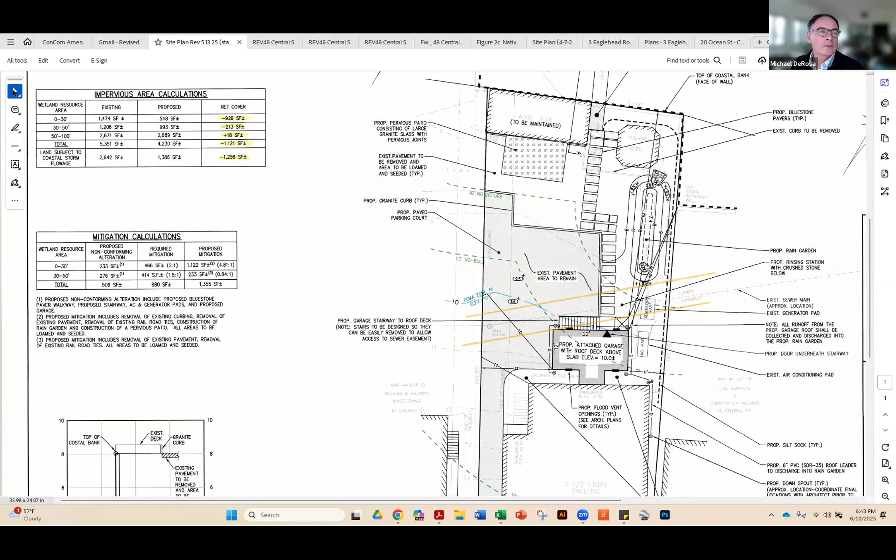It's from the engineer's plan. I can take my lines off, but you can see they're probably from, maybe Letitia can talk more eloquently about it, but I think they're from the easement language.

From the survey. Yeah, so I'm Leticia with the Moore and Cameron Group, 66 Elm Street, Danvers, Massachusetts. All the existing conditions came from a precise field survey from North Shore Survey. All the general notes are on the top left corner. And then the easement lines come from the deed.

One of the reasons I ask about these is that there is a sewer easement line marked with S's and intermittent lines, and then there are two boundaries around it at a distance of maybe 8 feet. But it's not perfectly in the middle of that boundary. So I'm wondering which of these is the most reliable line. Is it the one marked S?

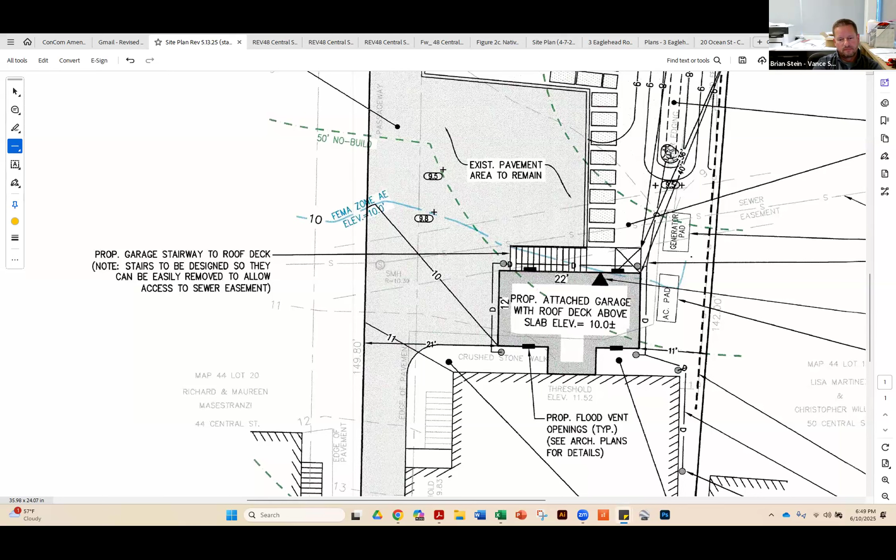So just to review what you said about egress, it wouldn't be sufficient to be able to go into the garage from the lower level? Not from that bedroom, no. Bedroom needs an egress window. Or a door that goes out directly to the outside.

Okay, anybody else on the commission? David? Yeah, Steve, I've got a question.

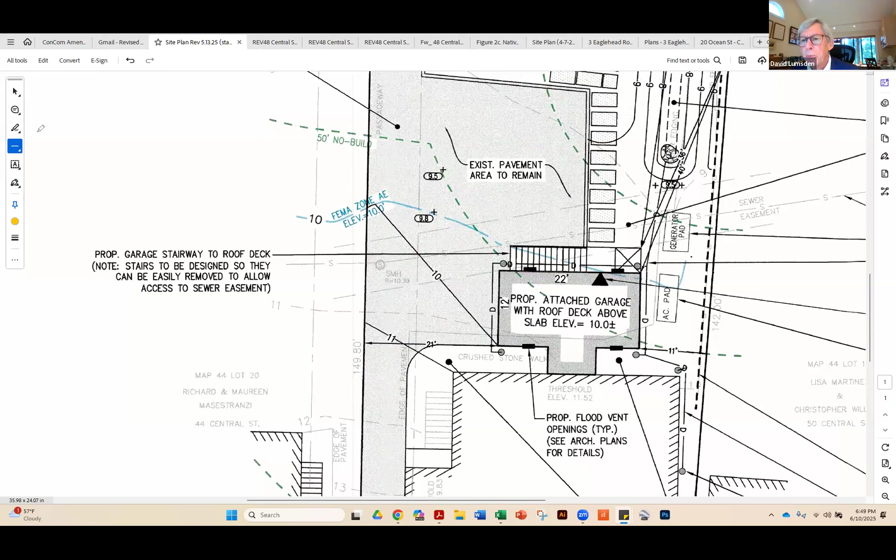I'm concerned about rising sea levels. Did we receive any data on what the MLLW is, the mean lower low water level, on that site? There's data out there on the 19-year average of what the mean low water level is.

My concern is flooding. What are you asking, David? I'm wondering what the level of that garage floor is going to be. How much above the mean low water level will that be? Will it be subject to flooding?

Mean high, you mean? Well, you could give me the mean high as well, if you have that data. The floor of the garage will be just above elevation 10, which is the FEMA flood. Mean high is usually around elevation 4.5.

Well, according to some data I'm looking at right now, the winter storm of 2014 had a height of 14.57 feet above the MLLW. Well, that was probably the result of storm surge. No doubt about it.

Shouldn't we be planning for the eventuality of rising storm surges? Well, we can't design for storm surge. We can design, and we're required to design, for the elevation 10, 100-year flood. So that's what we have to meet, and that's what

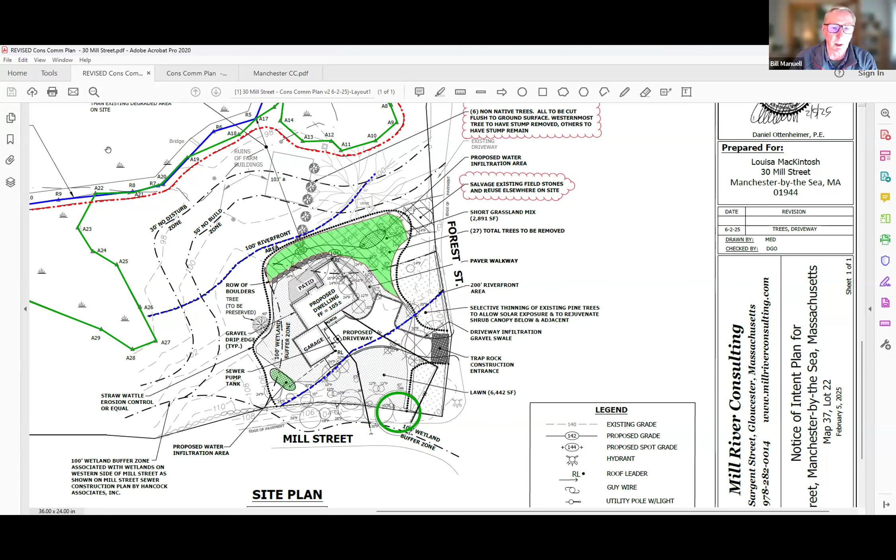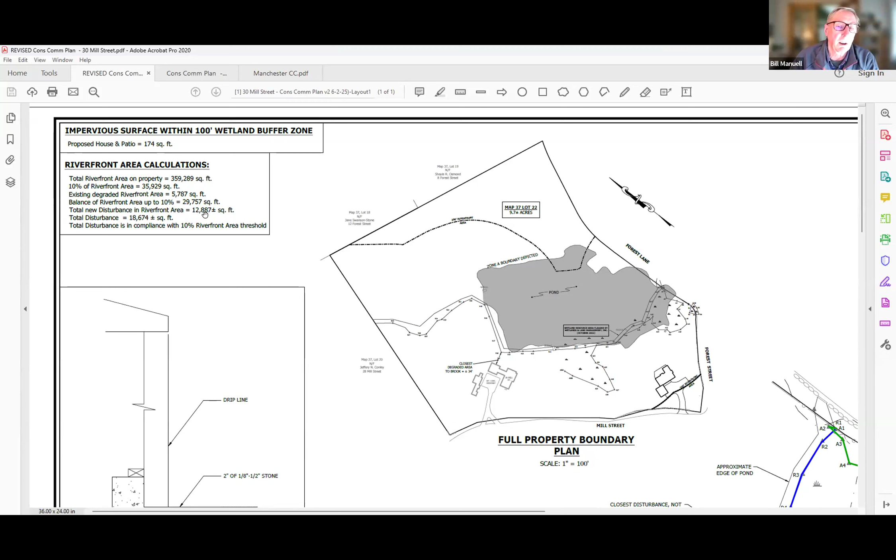The chart of your riverfront area calculations, remember this is a riverfront redevelopment project. The first criteria is we can alter up to the balance of 10% of riverfront area on the property. The site is over 9.7 acres, and the amount of riverfront on the site is about 8.25 acres. So we had about 29,000 square feet of potential impact we could have used in addition to the current house site and still be under the 10%. We're much, much less than that - we're down here at the 12,887 square foot impact. So we are well under the 10% criteria. We meet all the riverfront redevelopment criteria. I've gone over that in my original narrative.

So we think we have a better project here now that we have realigned the driveway. As I told you, Louisa had a walk with the tree warden. We did survey locate all of the trees within the work area and plotted them on the plan - most of them are what I call candlestick pines. They're very tall and slender and only have needles up at the top. 27 of those are coming out, but the tree warden didn't have a ton of heartburn about that. Louisa can convey that conversation better than I, but the gist was tall pine trees like that shouldn't be around a dwelling, so they didn't have a whole lot of concern with the trees being removed, but were appreciative of the efforts to take care of this 43-inch oak.

So with that revision, we hope the commission appreciates the plan, and we're hopeful that you can see your way to close the hearing and vote for an order of conditions tonight.

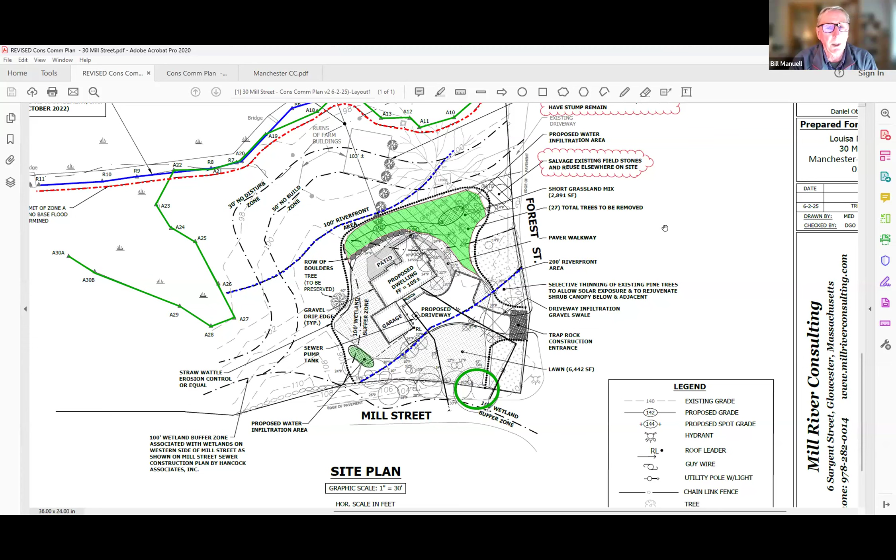That is correct. The overall 9.7 acre property is fairly well undeveloped. The existing home site is only on the order of 5,700 square feet of impervious surfaces and previously degraded area. So the remainder of the parcel is just largely wild. You can see the minimal footprint for the one additional house on this side of the property.

That's great. Excellent. Other questions or comments from the commission? Real quick, Bill, what is a trap rock at the beginning of the driveway? That's a construction entrance or a tracking pad for construction vehicles. When they leave the property, the wheels have a chance to turn over stone and shed any mud or soil that's on the wheel. Ah, thank you, I didn't know what it was. All right, let me ask for any public questions or comments about 30 Mill Street.

I'm hearing none. Commission ready to close this hearing? Yes. I'll move that we close the hearing for DEP file 39-928, 30 Mill Street. Second. Thank you, moved and seconded. All those in favor? Sari, yes. Jeff, yes. David, yes. Olga, yes. Henry, aye. Gordon, yes. And I'll make that unanimous, 7 in favor.

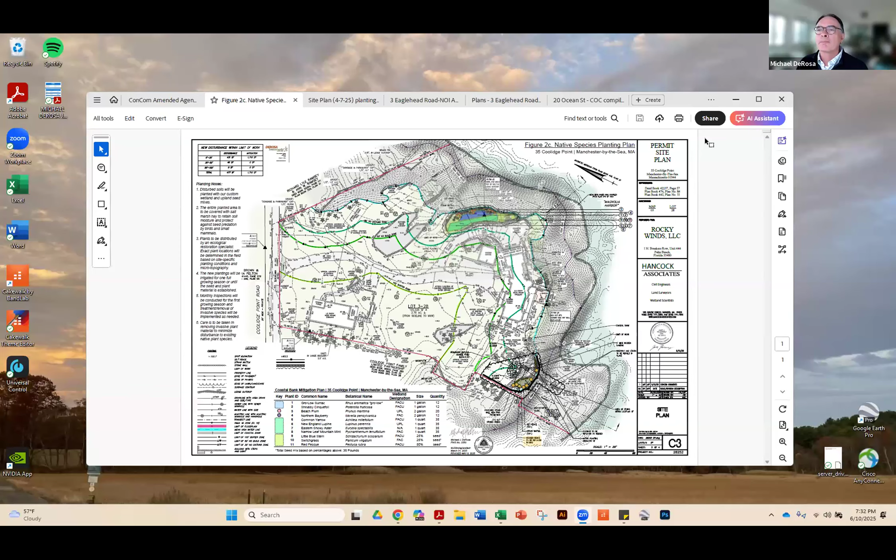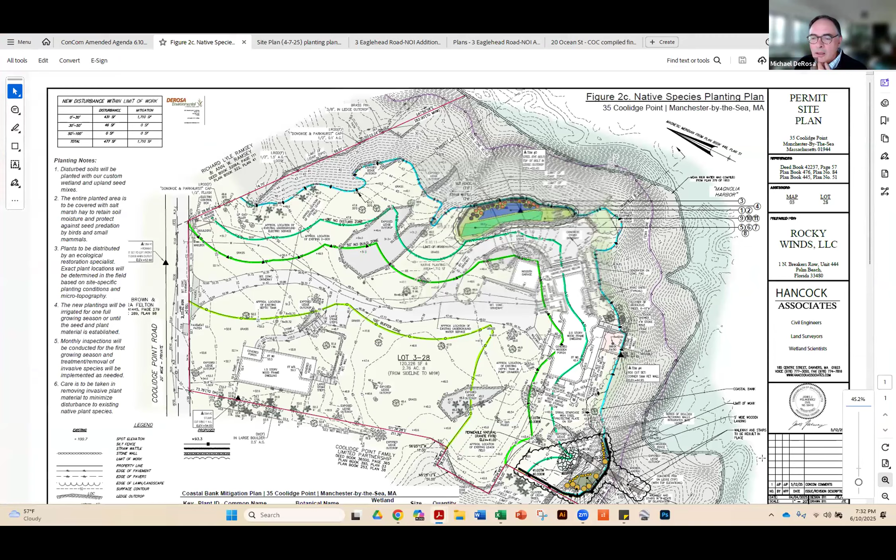Hello everyone, Mike DeRosa, DeRosa Environmental. I'll share my screen. Since the last meeting we walked the property, and I'll zoom in. There were 2 changes to the plan. As you remember, it's the replacement of the stairs and then the patio.

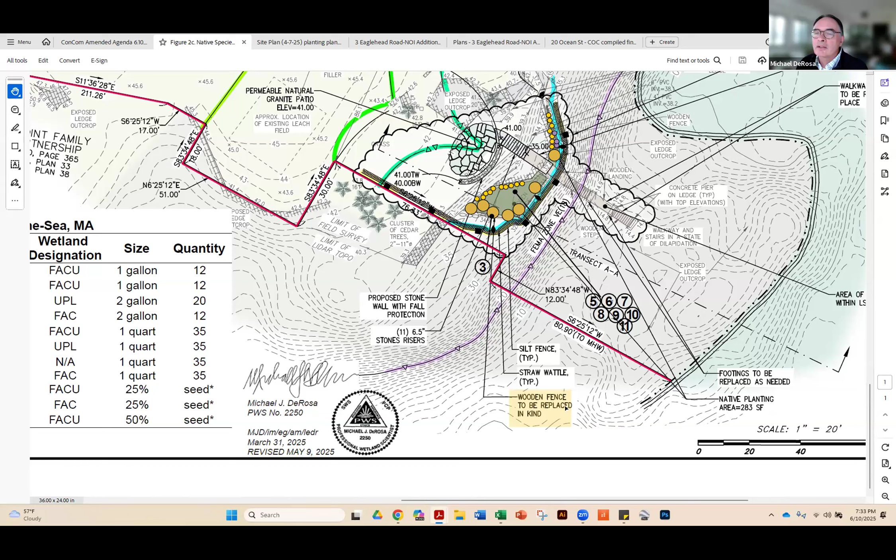We decided, the commission recommended, and we added an additional restoration area here in addition to the one on the other side of the property. This is sort of a low-lying area below the wall that isn't really providing any function, so we decided, on the commission's recommendation, to return this more to wildlife habitat and pollinator habitat. We added additional shrubs and herbaceous material in here. And then the other thing we did was add a note for this wooden fence that's there already to just be replaced in kind. So those were the changes we had based on the site walk.

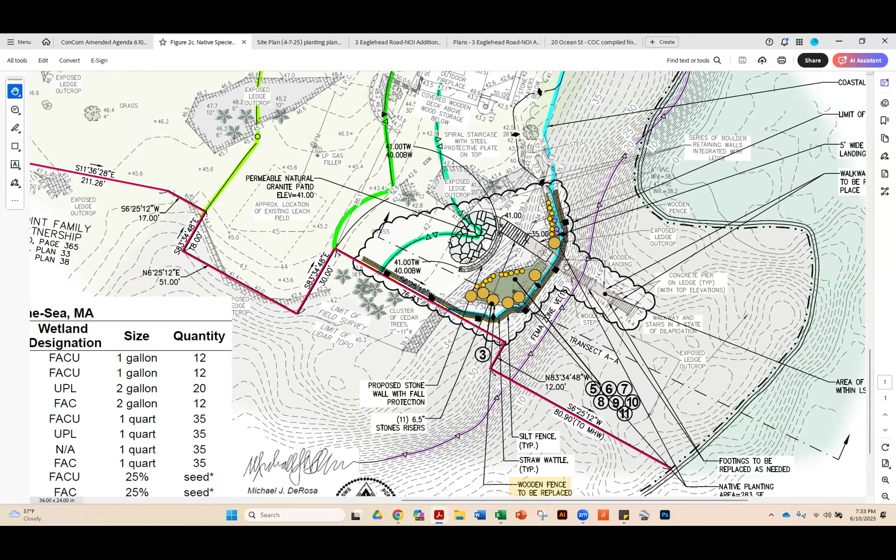We can take questions now if you want, but we're hoping the commission... Anybody on the commission have a question or comment for Mike? No, I'm pleased with this project. Yeah, so am I. Anyone in the public? Did they have a site walk question? It was really helpful to understand what was going on with this, so I'm very supportive of this.

Excellent. Anyone in the public have a question or comment on 35 Coolidge Point Road? I'm hearing none, so commission ready to close? Yes, I will move we close the hearing on 35 Coolidge Point Road, 39-930. Second. Thank you, all those in favor? Jeff, aye. Olga, aye. Henry, aye. Gordon, aye. David, aye. Sari, aye. And I am an aye as well. That's unanimous.

Thank you, Mike. Thank you everyone. Hey, Stephen Gang, Larry LaFreniere, thank you very much. You're certainly welcome, Larry. Thanks for attending, welcome to Manchester. Thank you, team.

Now we have a new notice of intent from the Plains, Manchester by the Sea. The owner and applicant is Manchester Housing Authority. This is Mass DEP 39-933, map 58, lot 66.

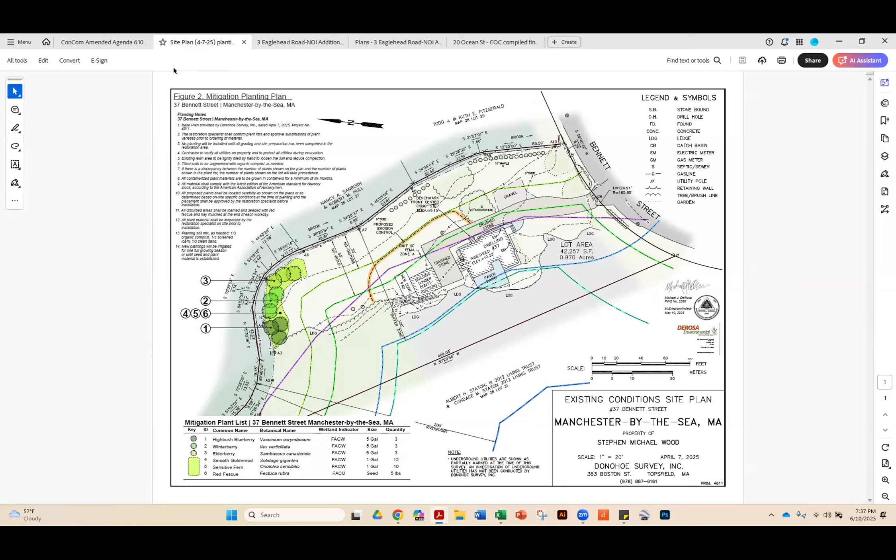Is that staying in place? I don't think we had a problem with that at the site visit. It's a very temporary structure. It also sits very lightly on the forest floor without any disturbance to the leaf litter or other conditions of the floor. Yeah, there are no footings or anything.

Okay. Other questions, comments, now from the public on 37 Bennett Street? Hearing none. Steve, I noticed one thing.

Yes, David. There's a lot of debris from that outbuilding. It's piled, and it looks like it's within the restricted area. I could be wrong, I didn't measure it, but we should be asking for that debris to be removed — it's been sitting there for months. That's brilliant, David. It's been drafted into the special conditions. Okay, good, thank you, good catch.

We'll get to that when we get to voting on the notice of intent, the order's conditions. All right, I'll move we close the hearing on 37 Bennett Street, DEP file 39-931.

Is there a second? Second. Thank you. All those in favor? Sari, aye. Gordon, aye. Olga, aye. David, aye. Jeff, aye. Henry, aye. And I'll make that unanimous, 7 in favor.

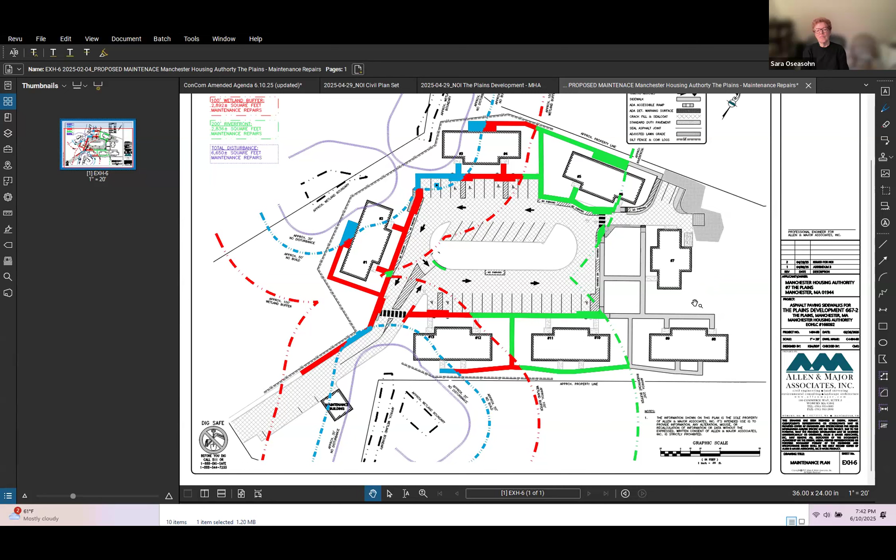And again, this is all previously developed within these setbacks. There is no additional layout or reconfiguration given the layout of what is existing on site. Excellent, thank you. So the small amount of additional impervious is outside of our jurisdiction, correct?

Yes, and they've been looked at. We've kind of transferred some of that proposed impervious to gravel in the back there, just to keep this a no-increase of impervious surface on the site. Excellent, thank you. Other questions or comments, from David?

Thank you for doing this project. As a former chairman of the Housing Authority, I'm very much an advocate for rehabbing or restoring our elderly housing units here in town. Wondering, where's the funding coming for this project?

This project is in HLC, Executive Office of Housing and Community Livable — Housing and Livable Communities, formerly the DHCD. So it is state funded, it's a state funded project. Who applied for the grant?

My understanding of how these work: the Housing Authority executive director works with the state project managers assigned to different housing authorities, and they make a list of items and repairs that need to be done. Site improvements come through funding. Every housing authority gets a certain amount of money every year based on the number of units that they have, so less units, less money, but it is yearly funding grants. Someone from the state or the housing authority can probably speak more intelligently on that.

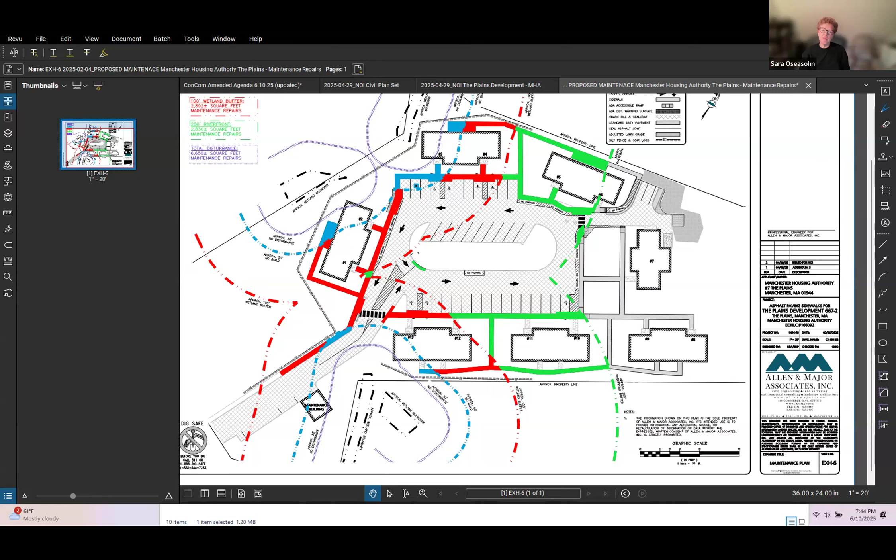Yes. Can I hear a motion? I move we close the hearing on 0390933, The Plains, Manchester by the Sea. Second. All those in favor?

Olga, aye. Henry, aye. Jeff? Jeff. He's making eyes as best he can, aye. Thank you. Gordon, aye. David, aye. And it's unanimous again. Thank you, great. Catherine and Allen and Major. Great, thank you so much.

We come now to two projects which are probably the main event this evening. But before we introduce those, I'm simply going to remind you that this is the Conservation Commission, and our job is to protect wetland resources, not property values, or to delve too deeply into engineering alternatives as much as we might like to, nor to be the beauty police. We don't control aesthetics, so I'm going to ask people to limit their questions and comments to things that we can act on as they pertain to wetlands.

Thank you for that preliminary. Let me introduce the first one here, which is Mass DEP 39-934, Central Street: a proposed municipal project to remove the so-called tide gate, replace the existing culvert with a 20-foot wide arch culvert, and make minimal roadway improvements. This one's all within riverfront, land under the ocean, coastal beaches, coastal banks, and land subject to coastal storm flowage. The applicant is the town of Manchester.

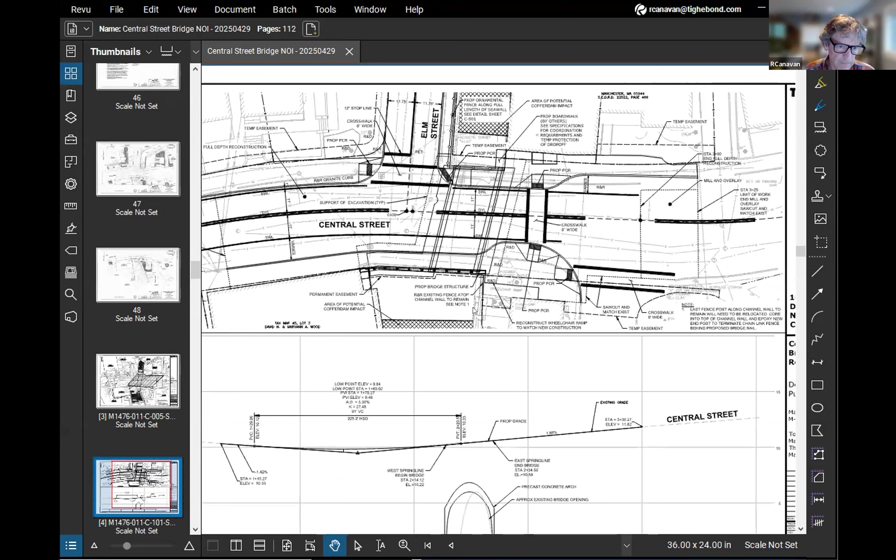It's a full traffic closure, and here are some images of the replacement.

So this is the existing bridge opening and the proposed bridge opening. It's an expansion of the hydraulic capacity to allow for better tidal flow into the pond area, which improves the hydraulics of the opening and improves the ecology of the upstream pond and stream.

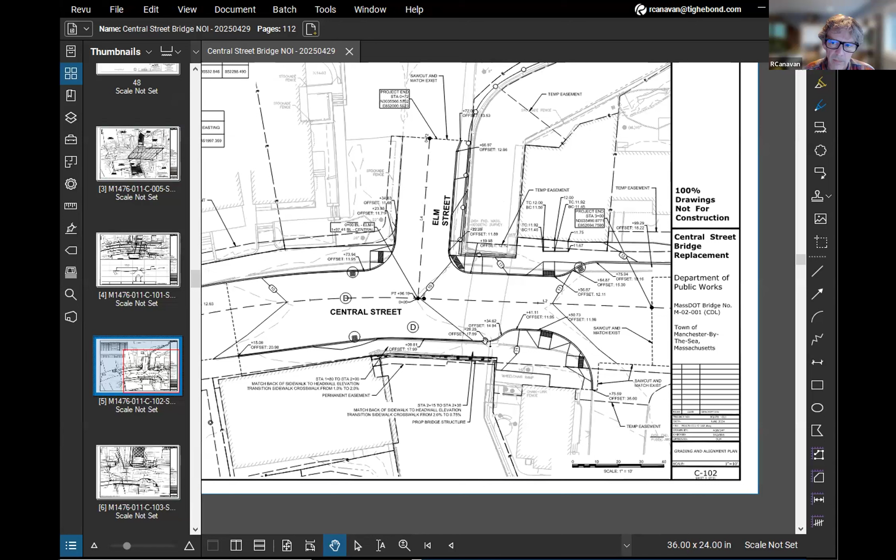The project includes—there's not a lot of space for stormwater improvements, but there's a new deep sump catch basin where my mouse hand is, and some traffic and pedestrian safety improvements in the intersection area. It's a very tight project space, so there's not a lot of opportunity for other mitigation, but the main mitigation is the significant improvement of stream flow through the existing crossing from existing to proposed conditions.

So I think I'll probably leave it at that. I understand there's going to be a lot of questions, we can get into specifics, and I'll keep the plans up if folks have specific areas of the bridge they're looking to discuss.

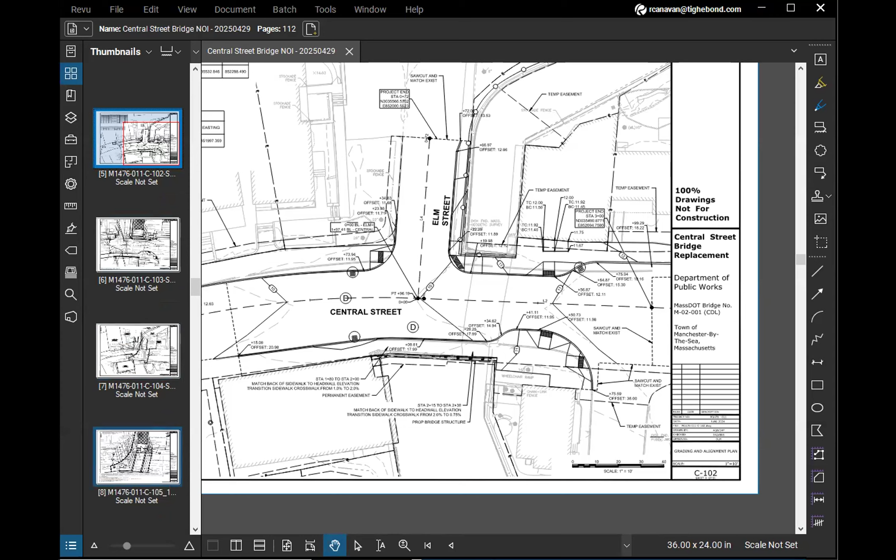So it's an appropriate question back to Nate and Chuck, the engineers, to expand further on that. It's somewhere further in these drawings. Thank you, Gordon, thanks.

Nate, do you have this one? Yeah, so we discussed that with Susan. She came to our office and expressed those concerns, which we relayed to our consulting engineers at Tighe & Bond. Those comments are part of our final markups on the bid set.

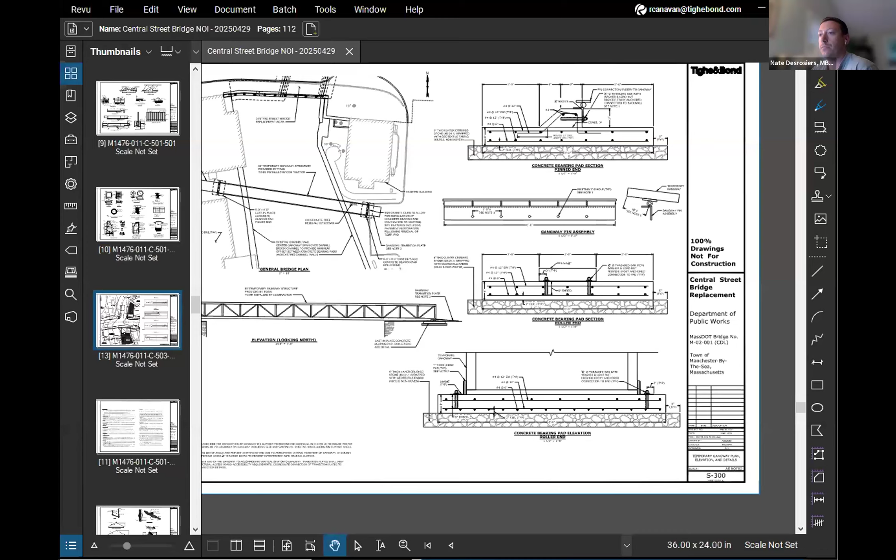We did work with the engineers to basically reduce and move that path back. Rick, if you can go to that previous page you were showing with the corner of Elm and Central. Sorry, yep, no problem. Where is the temporary bridge? So I think we're conflating two items here.

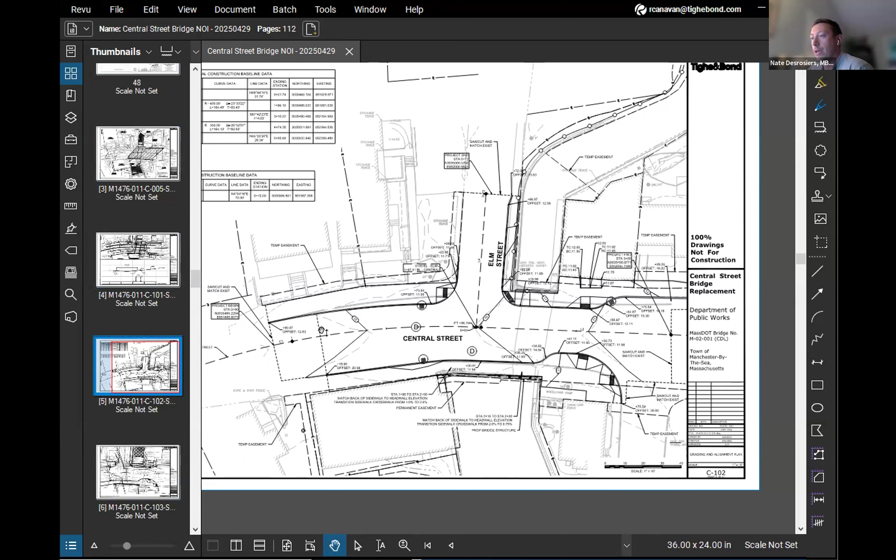There is a separate gangway that we are proposing on the south side of the culvert behind Seaside One, and it would land on the Sea Rock Estate property between 26 Central and Sea Rock, but entirely on the Sea Rock property. The question Susan was asking is more specifically about these two trees on the corner of Elm and Central. We were essentially showing there, yeah, if you can zoom in, perfect.

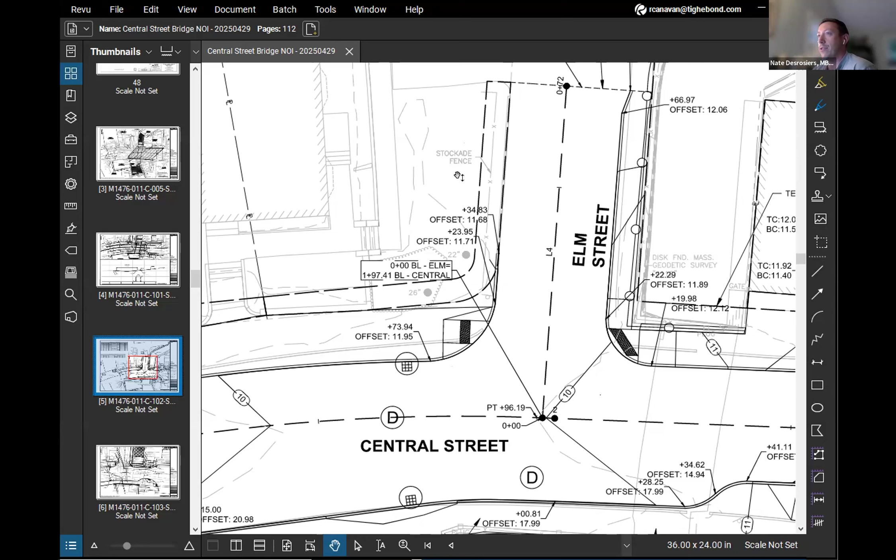Because we have to reduce the lane width of Elm Street to facilitate construction, it goes to one lane. So we were basically forced to push the lane over, which would have pushed the easement area into those trees. We worked with the engineer to revise that area, reduce the easement, and pull back that walkway. I think there's another plan that shows where the stockade fence is. That would be a temporary sidewalk to allow pedestrians to safely get down Elm Street. So we've pulled that all in and tightened up that area, so we do not have to remove either the 22-inch or the 26-inch trees shown.

Okay, good, thank you. But also people should realize there is an easement between Elm Street and Morse Court that goes right through Sawmill Circle, and Windover left that easement there, which could easily be a pedestrian walkway. So you wouldn't even have to knock down our stockade fence and have people walking through our front yard, it can go right through Sawmill Circle. The easement is there and it goes right onto Morse Court. The Morse Court property is owned by Sea Rock, and Eddie Favaza owns Sawmill Circle. So that easement exists and can be used for pedestrian walkway instead of using our yard. That's good to know, thank you.

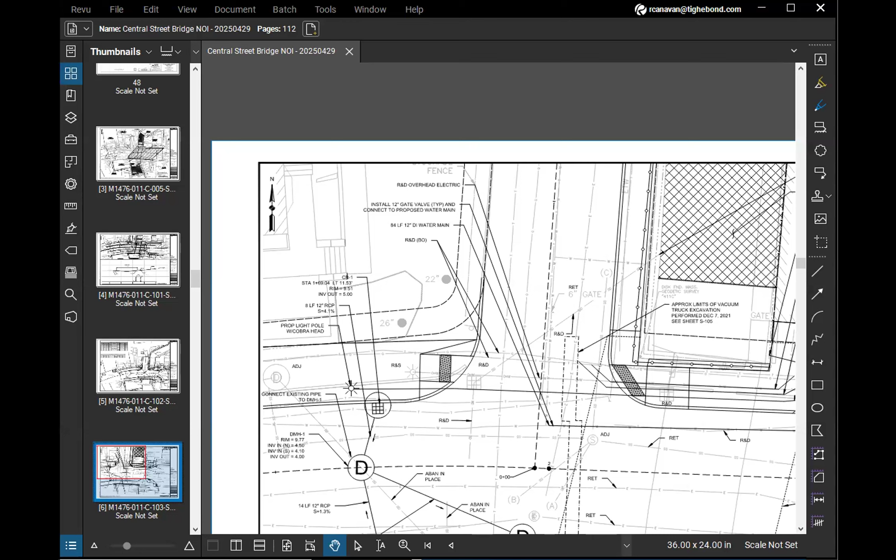Well, I'm glad to hear you've re-engineered this so the trees don't need to be removed. If it's just a temporary walkway, I presume there won't be any significant excavation or damage to the tree roots. Correct, we would keep that all above surface level. That's great, thank you. And just for clarification, Steve, is there any concern about the temporary gangway and any environmental impacts that might have, or has that been resolved with this change?

The one behind Seaside One. From the public comments, yeah, I think there were a few. There's one tree behind Seaside One, but was there any other public concern about environmental impacts of that? Actually, it encroaches on my property.

Rick, do you have a map up? Because I no longer have it. Yes, we're seeing a map of the intended site of the temporary gangway. Okay. I've lost it. Better? No, but that's okay, I'll look at the plans. Sounds like it's on your end. Are other people having trouble seeing the shared screen? I see it, I have two screens, both on. Good, I see it.

Okay, so that one calls for the removal of a small tree behind Seaside One. And yeah, obviously some parking spaces too. Yeah, and again, we're hopeful we can realign this. Basically it's going to have to swing a little bit, on the western end it will come south, the eastern end will go north, closer to Seaside One. Hopefully we can save that one tree there, but it may require removal, which we would obviously replace in kind after the project, or with whatever tree the commission would like there. And we can certainly work with the tree warden to make a selection.

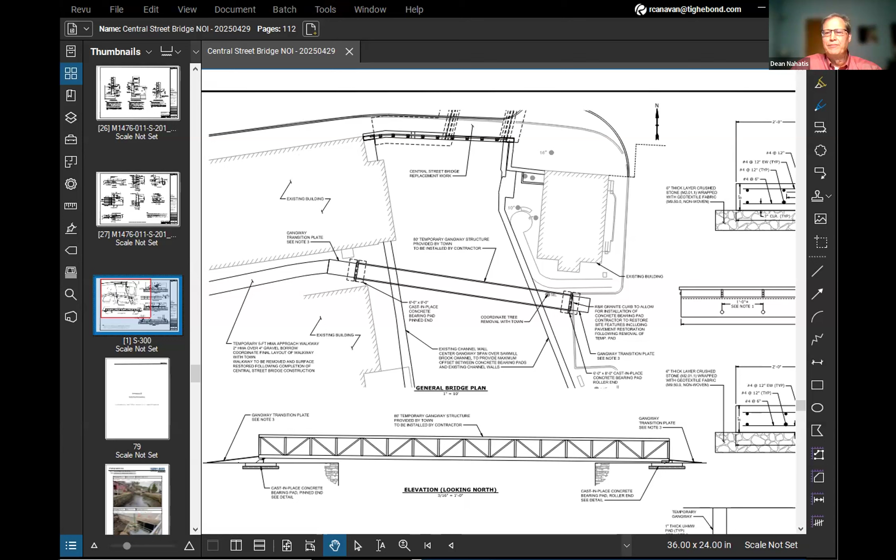Other members of the public have a question, concern, or comment? Not hearing any.

Commissioners, are we ready to vote? Steve, could we please vote on this? I believe we're ready to vote. Is the commission ready to vote?

Yes, I'm sorry, this is Christine Delisio. I have some questions. Who is this, please? My name is Christine Delisio. I see, and your address, Christine? 6 Lincoln Avenue. Thank you. Go ahead, I have a few things.

So I understand from the last comment that this did go through the MEPA review. Was a notice of project change filed for this go around? The project hasn't changed, so no. Okay, so is that still a valid application if it's 5 years old at this point?

Yes. Okay, and so I believe there was some property that changed hands within the project, so isn't that a significant change in the MEPA process? No, I don't believe it would be. Okay, I would like that on the record.

And then I would like to know how the people on the pond and Sawmill Brook were notified. I have several friends in that area, and I think I may actually be within 300 feet. I'm just curious how people who live on the brook, on the pond, were notified, because many of them I know did not receive notices.

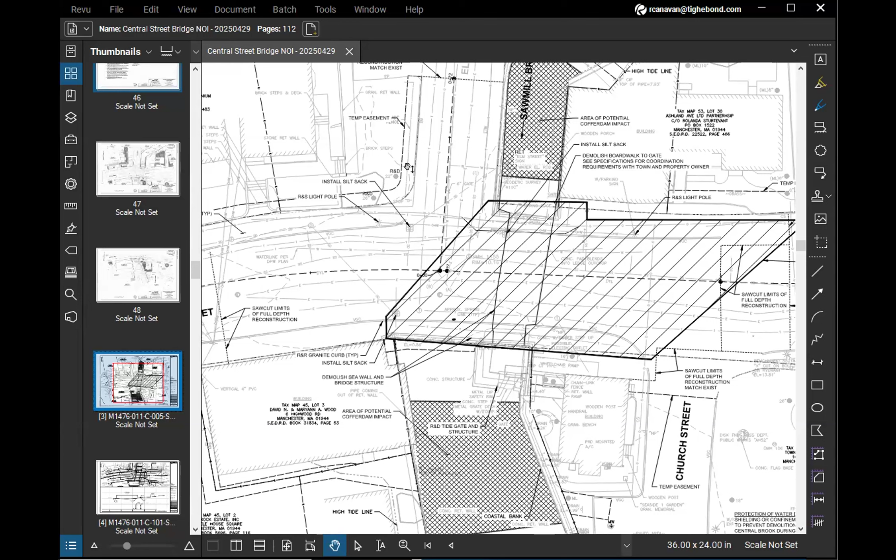So for the pond and the bridge NOIs, we had submitted to the Manchester assessor, as I'd shared previously, the project area for the two different projects. They developed a list of abutters to each of the projects and then provided a certified list, and we sent notices to abutters for each of those projects. It was approximately 40 notices for the bridge and about 80 for the pond.

Okay, I think I did ask for that information. And Ms. Delisio, you can find that on our website under the documents for tonight's meeting, at the end, Appendix C, at the end of the NOI application for this project, there's a 300-foot abutters list report.

Oh great, thanks. So I do have a question. There was some monitoring, some pre-construction habitat monitoring that was supposed to happen in 2020. To me, I'm not sure how you could close that out if that should have been performed regardless of a project. That should be ready to hit the shovel, or whatever you do to do some pre-construction habitat monitoring. When's that happening? Is that for this project or for the pond marsh project? It's for both, they're one project.

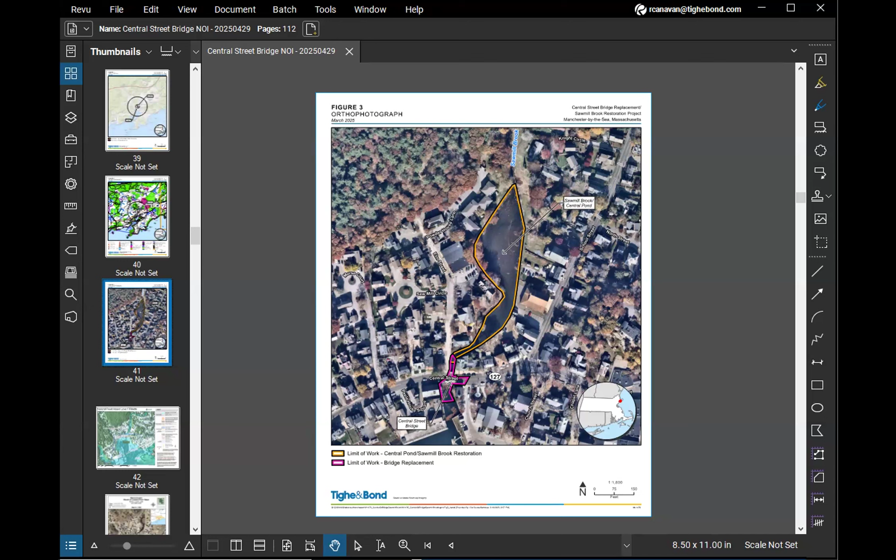I will move that we close the hearing on Mass DEP 0390934, map 28, lot 30, Central Street. Second. Good, second. Thank you, Olga. All those in favor? Jeff?

Aye. Henry? Aye. Olga? Aye. Gordon? Aye. David? Aye. And I am also an aye. It's unanimous. The hearing is closed.

We will talk about the specifics of the order of conditions and vote on that. That brings us to the second of these twin projects, Mass DEP file 39-932, Central Street, also east of Elm Street, town of Manchester-by-the-Sea, map 28 lot 30. Proposed project relative to retaining wall repair, replacement, and construction of a living shoreline. This is also within riverfront area, coastal resource area, land under the ocean, coastal beaches, coastal banks, and land subject to flowage.

Can we have a brief review of what's proposed here, Mr. Canavan? Getting off mute, sorry about that. So I've just shared a plan of the proposed ecological restoration at Central Pond, Sawmill Brook flowing through Central Pond.

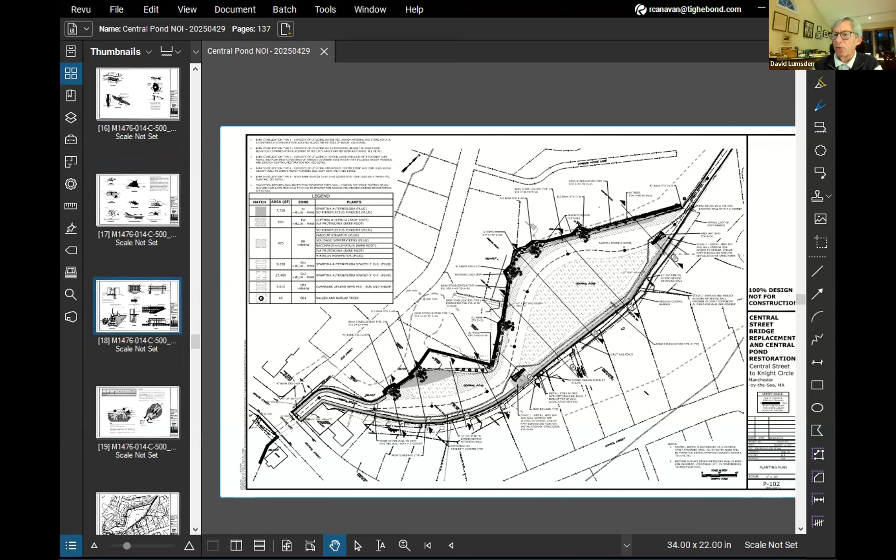Since I lived on that brook, I recall when we moved there in '84, the granite stones on the right side of your map were perfectly in place. Due to storms, the water frequently came up over those granite stones and displaced the stones along most of the length entirely. They were all displaced behind my former house on Knight Circle. So my question is, how will the new construction be any different? It won't be any higher, so we'll still be subject to flooding. But what will be done in the way of engineering to pin those stones against the bank and keep them from piling over again?

Good answer. Thank you for that. Other questions from the commission? How about from the public? You want to have a short, succinct question or comment about this aspect of the project?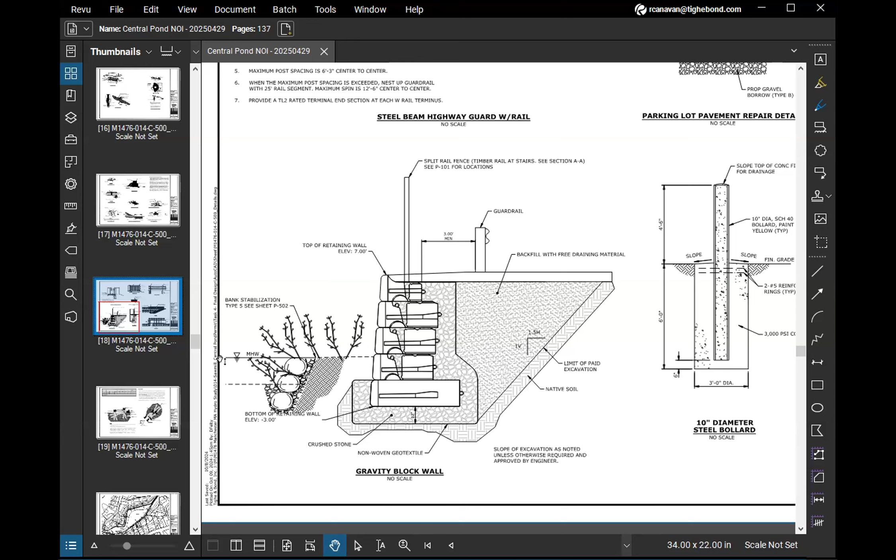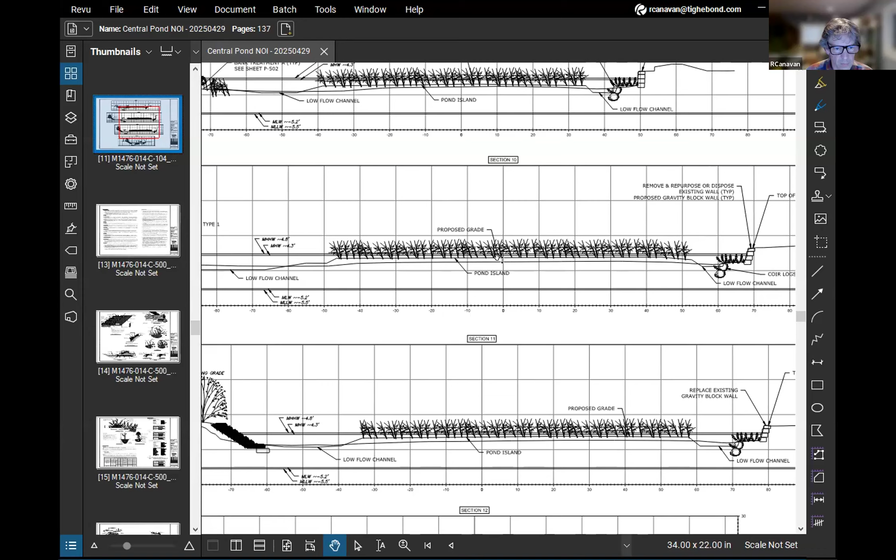Yeah, so like in this particular cross section, we've got mean high water and the top of the retaining wall. There's some other cross sections that show the entire layout of one side or the other, so you can see it. This is a smaller scale, but you can see the retaining wall on the south or east side, the proposed Spartina planting on the existing flat, and then the encapsulated soil lift living shoreline.

So there are mean high, mean low low, and then there's also a scale on the plan, so if you had whatever elevation you wanted, you could look across the sheet. Obviously, I get that it's a tight scale given the width of the pond cross sections, but there are tidal elevations on these cross sections and also an elevation scale on the cross sections that would allow you to look for other references if you had other elevations you wanted to look for. Right, because on the bridge elevation there's an 8.2, which is up above the bank, and that would kind of show more graphically in cross section if you had it there. So I was wondering why it was omitted.

Yeah, I mean, there's a lot of information. It's a wide cross section, so we went with the scale using those jurisdictional mean high and low, and in these cases we didn't have the FEMA on this one. In a lot of cases, like parking lots and other areas are under the floodplain, so that's a little less relevant here. All of our work is in floodplain in this location, so it's not going to change after we're done.

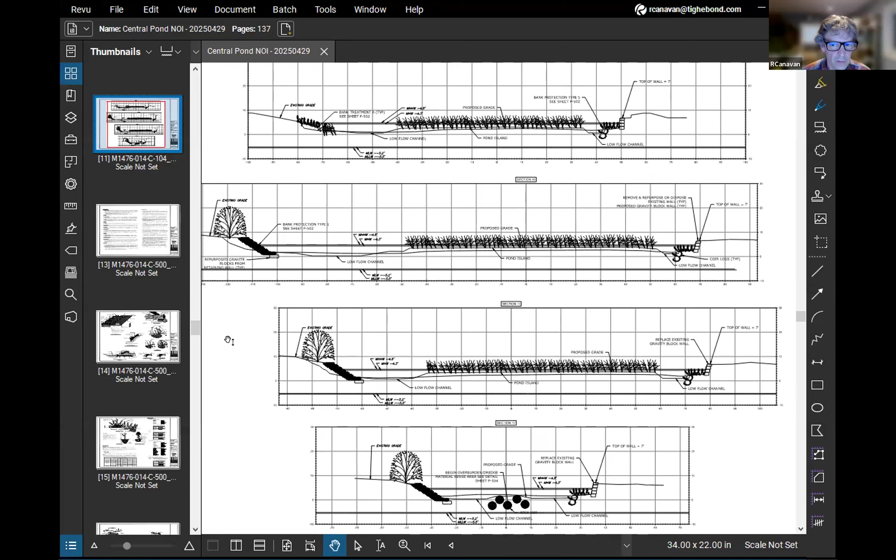Okay, thank you. Thanks for that answer. I see a hand for Marianne Wood, or would you identify who it actually is, if it's not Ms. Wood? There's that hand leftover. Oh no, nope, it wasn't, I just hit the wrong button.

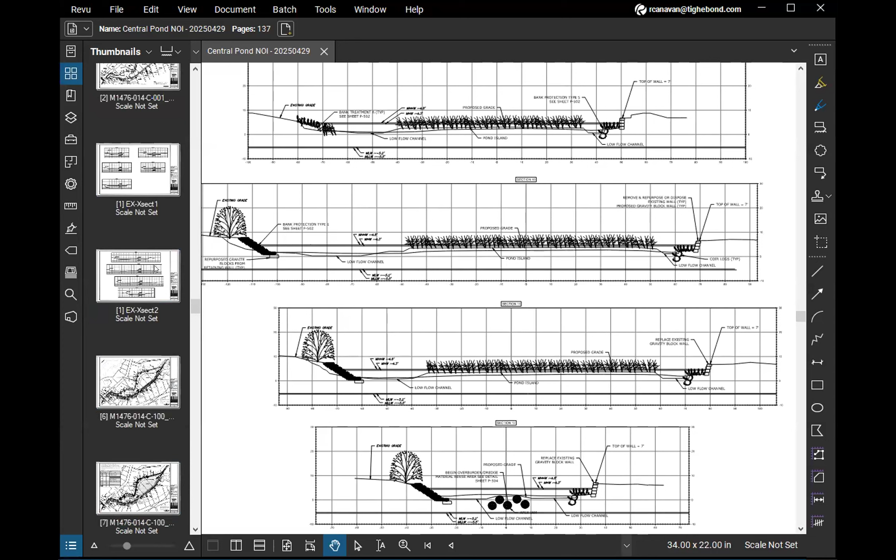Sorry, this is Christine Delicio, 6 Lincoln Avenue. Just big high level, I mean, I think most people have a hard time understanding that you're going to take a culvert, just say for instance it was 1 foot, you're going to make it 5 feet, and you're going to make flooding all along the brook better. So I hear these wishy-washy statements. I'm pretty darn close here, I think we're all going to be affected by flooding of Sawmill Brook and up School Street. So where's the guarantee that this is going to help? When I've read these plans, it doesn't guarantee it's going to help this. So why are we letting more water into everyone's backyards and all along School Street if we can't really tell that this is going to help? Is this like a big guessing game? Is it a big environmental project that's hopefully it goes well? I mean, where's the actual, yes, this will improve?

What is your specific question? Where's the science and where's the guarantee that this is actually going to help flooding on Sawmill Brook and all the properties along School Street?

I'd refer you to the H&H studies that are on the website and the basis of design, and all the studies that were done in 2016 with CZM grant funding that studied the entire reaches of Sawmill Brook, that kind of went through and analyzed all the questions that you're asking right now. Right, they're all on the website with the H&H analysis. Oh, and I've read, I think they are 396 pages, and it says you're not sure if it's going to happen.

Excuse me, why are we doing this project? Ms. Delicio, could you let Mr. Dam finish?

I was just gonna say, I think it is very specific. It shows in the H&H analysis the different storm interval frequencies and the corresponding control. There's absolutely no guarantee that there will be control for future scenarios where there's increased storm surge or inundation, but that's just the nature of Manchester by the Sea in all locations. So this actually does improve the hydraulic condition. There's no doubt about it, and we have not been wishy-washy whatsoever. There's existing conditions and then there's proposed conditions, and if you read for yourself, you'll see it. The only time that I've seen comments like 'may help' is when we're talking about self-regulating tide gates that we haven't evaluated as part of this project. So that's all I can really say to that.

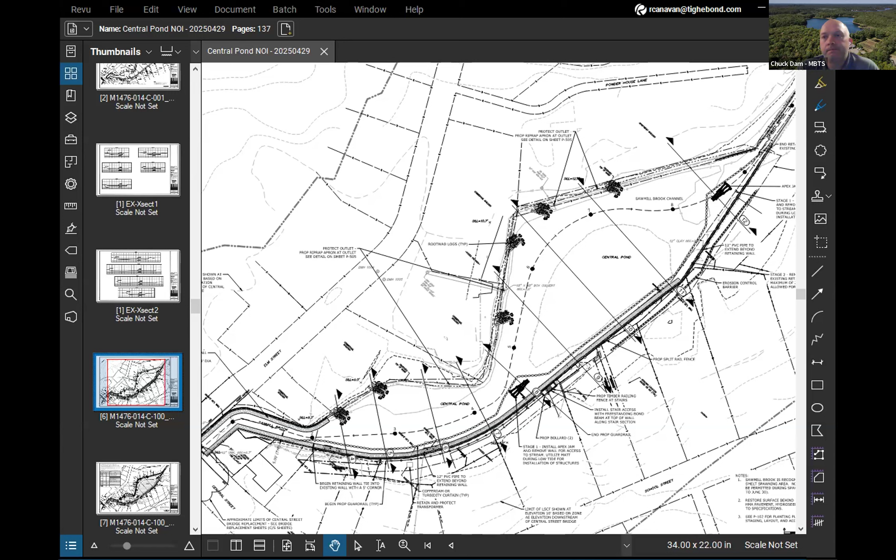Okay, thank you. And I guess from the Concom perspective, we're in the habit of approving projects that we know will be impacted by severe storms and flooding, wave action, storm surges, et cetera, and so does the applicant. So no one's prepared to issue a guarantee that a single project, no matter how ambitious, is going to guarantee that properties stay dry around Sawmill Brook.

Because nobody can issue that guarantee that I know of. Other comments from the public? Questions? I'm hearing none. Commission ready to close this hearing?

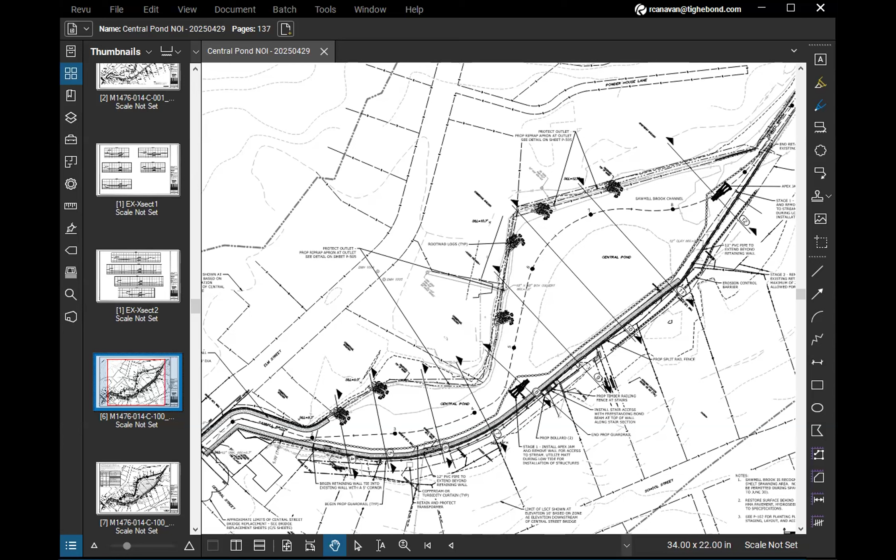Yes. I'll accept a motion. I will move to close 039-0932, map 28, lot 30, Central Street. Second. I'll second. Thank you. All those in favor? Gordon?

Aye. Sari? Aye. Jeff? Aye. Olga? Aye. David? Aye. Henry? Aye. And I am an aye. Unanimous again. Thank you, Chuck.

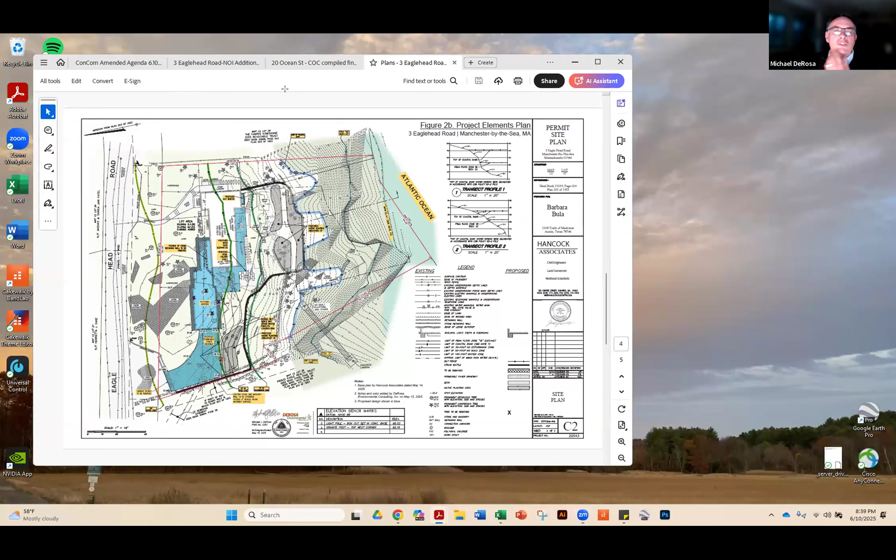Mike, are you? Yep. For the record, Mike DeRosa, DeRosa Environmental, and I'll share my screen. Too many things there. Hold on. Sorry about that. So, 3 Eaglehead Road.

This is the house. I think this commission's been out here before, years ago, for the patio work that we did. I'll give a quick overview here. The project is to cantilever out a little bump out from the kitchen area here, continue a deck out on the top of the first floor level around the corner, and then there's an addition out in the front. I'll go through all the plans with you.

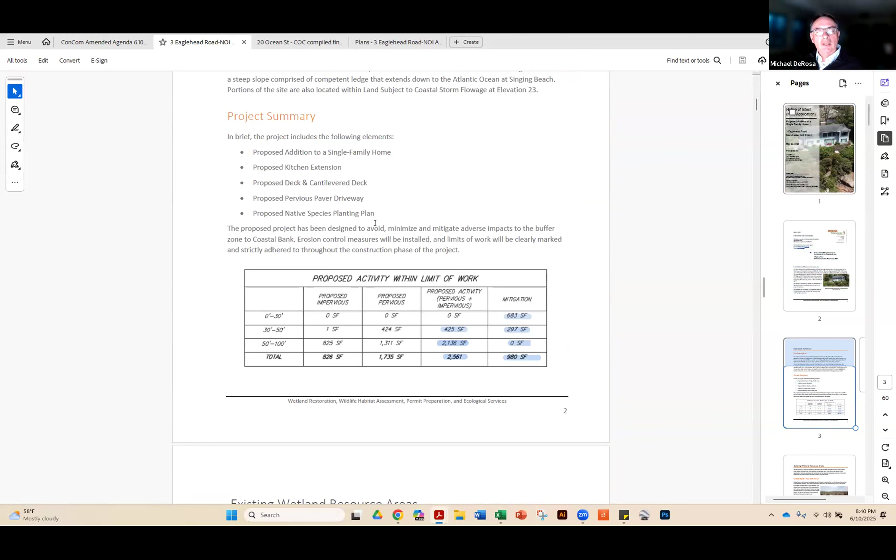So this is the project summary. We've got an addition to the single-family home, out in front of the house by the street, a kitchen extension, the proposed deck and cantilever deck, pervious paver driveway, and then a mitigation planting plan.

The numbers are these: we've got no increase in the no disturbance zone. We've got an increase of proposed activity of 425 square feet in the no build zone, which is largely the cantilevered deck and kitchen addition, and the rest of the work, 2,000 square feet, is out in the outer buffer zone.

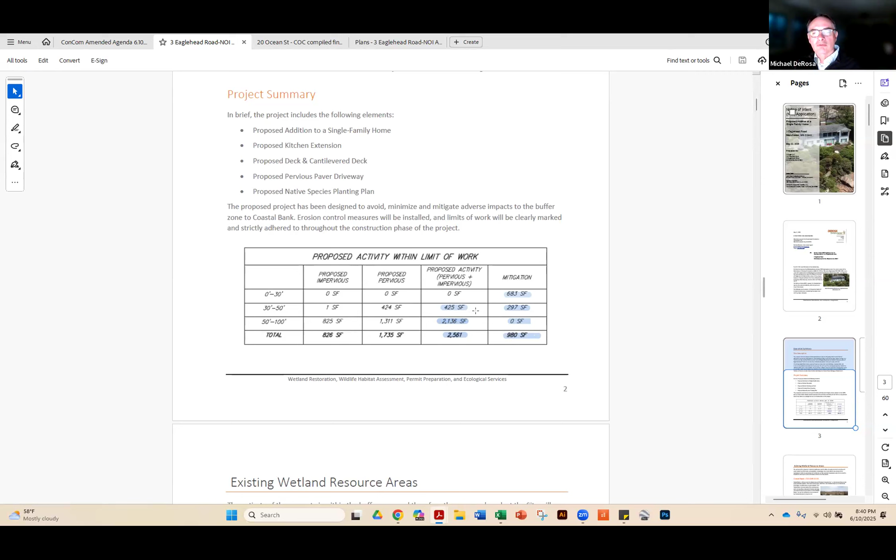We've provided a mitigation plan of 980 square feet to offset the work in the no build zone, the 425 square feet, which I'll go through. Coastal Bank is the driving resource area. I'm going quick because it's getting late. Let me go to the plan.

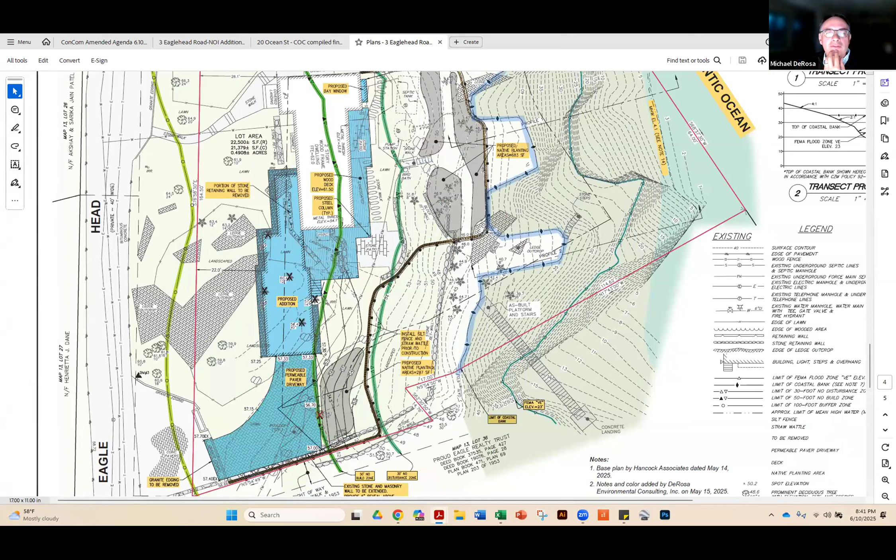So this is the site plan, and I highlighted the different elements since it's hard to see on the regular plan. This is the kitchen addition, which is cantilevered. This whole deck is cantilevered and supported by piles, steel posts here—I think there's 5 of them. That amount of work is within the no build zone, but it's already lawn and landscaped area.

Part of this is over the patio, and then this work is the work that's in the outer buffer zone. So the addition, there's a garage here, and then porous paver driveway, like we normally do. The gray areas are the mitigation areas. There's 6 trees that have to come down as part of the addition, and we provided 6 trees.

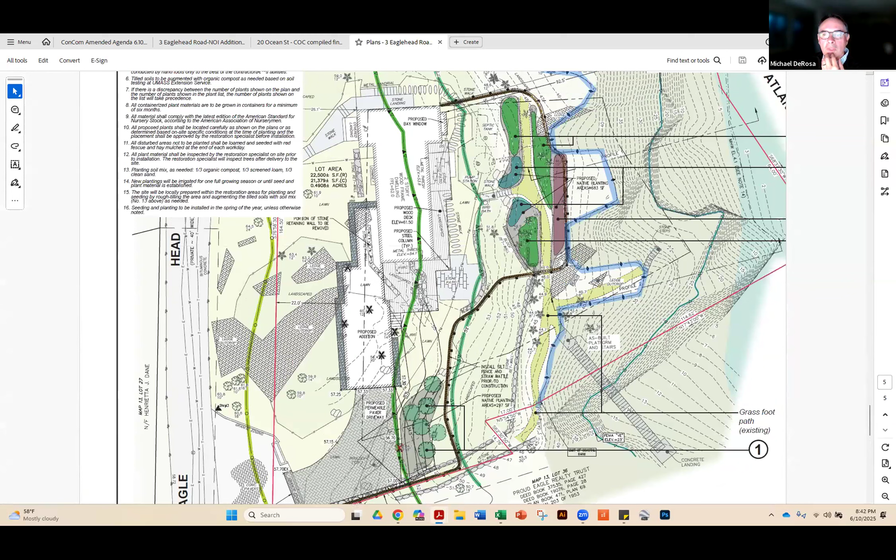I'll go to the landscape plan. So this is our mitigation planting plan, and I'm sure we're going to schedule a site walk so we can go look at this. There's a grass trail through here.

It's like a pitch pine understory, but it's grass. This area is where we want to do the mitigation because we've got mowed lawn that we can convert to native plantings that will do well in the understory and in the acid soils. Then we have this area here, which is 6 more pitch pine, because they're doing so well here we thought they would do well there. We also have understory plantings there as well.

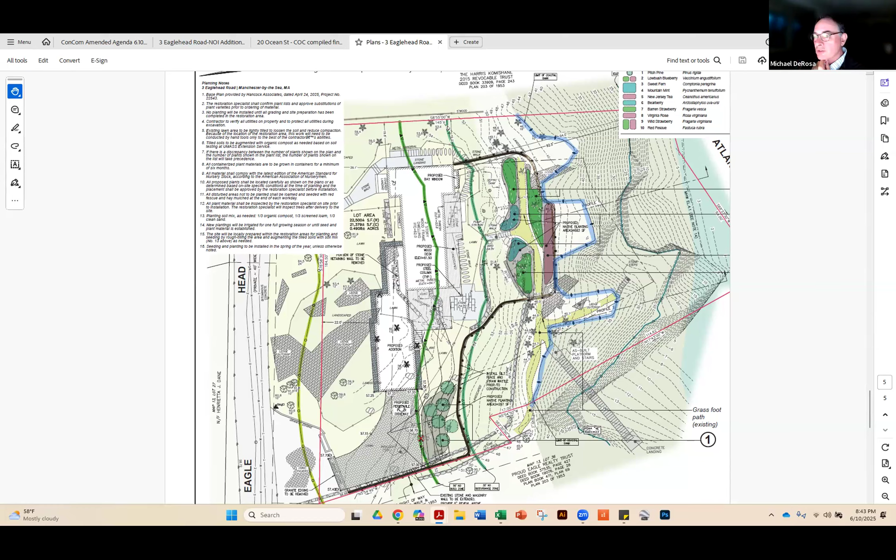So we feel that we've met the intent of the bylaw and the state regulations. The driveway is porous. We have details on the profile. So this is the permeable pavement.

There's spaces between the aggregate and the openings, spaces between the pavers, and then a depth of about 2 feet, 18 inches, 12-inch minimum here to the native grade, and this is all native ledge, really. And then this is all very coarse gravel, sand, and reservoir stone. And then we have a drip edge along the whole addition as well to handle the runoff from the roof there.

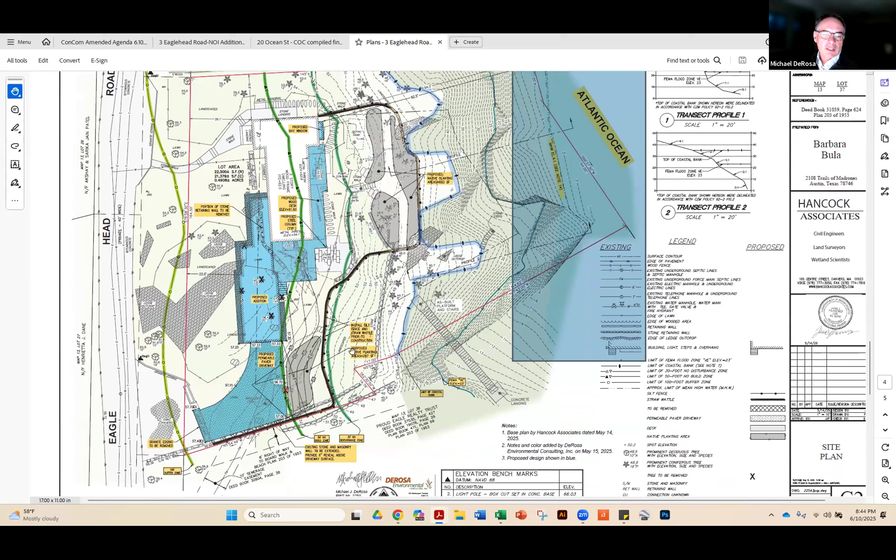So that's it. I think if there's any questions, I can take them now. We can schedule a site walk, whatever you'd like to do. Let's see if there are any questions or comments and see if we can pick a time for a site walk.

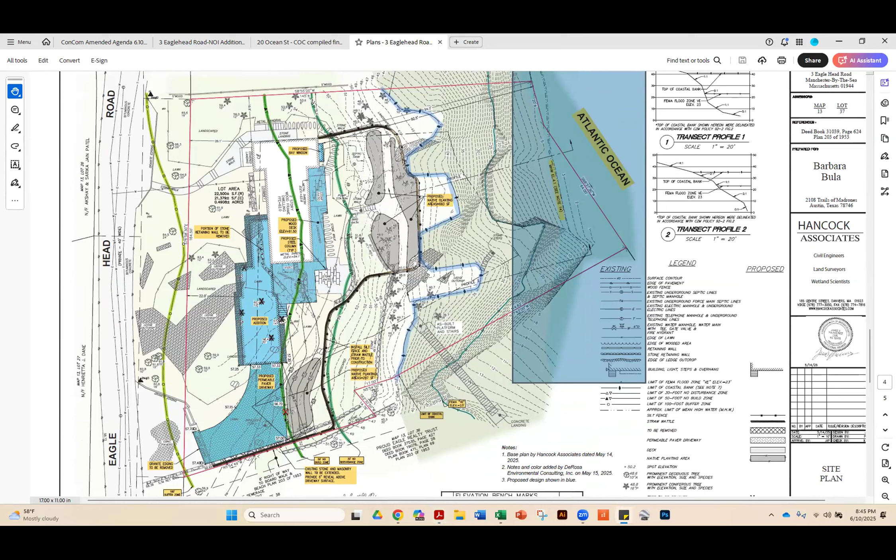Anyone on the commission have a question or comment? No, I just think we... Henry? I think a site walk sounds good to me, and we can hold our questions maybe until that time. Anyone in the public have a comment or question on 3 Eagle Head Road?

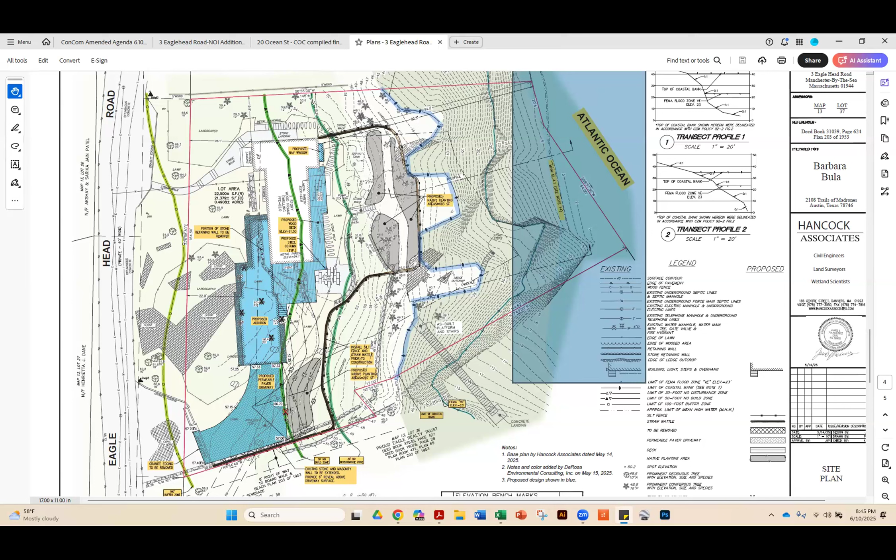Others do Saturday first thing? First thing being 8:30? First thing being around about 8:30, if that's acceptable to Mike or a team member. I can be there this Saturday. It's my mother's 90th birthday this weekend, so I think I have to get down to Cape Cod, but I can go after the site walk, so that'll work out.

Okay, 8:30 then? So who's going to be there? Only Henry and I'll be there. Good. All right, then, but that's only 2 commissioners. Just you and I. Can do 8:30. David? I can do a quick one. I think I can be there. I've got something else, but I'll move around for this.

Is it better earlier than 8:30? Yeah. I mean, I could do 7 o'clock, Mike. I see that look on your face. It's early, fine with me. Okay, we'll set it for 7:30. No, 7:30 is too early. 8 o'clock? Too early. Okay, how about 8 o'clock? Goldilocks. 8 a.m. 8 o'clock, Olga? Yes, good. I'm marching, so... after that. Yes, good for you. 8 a.m.

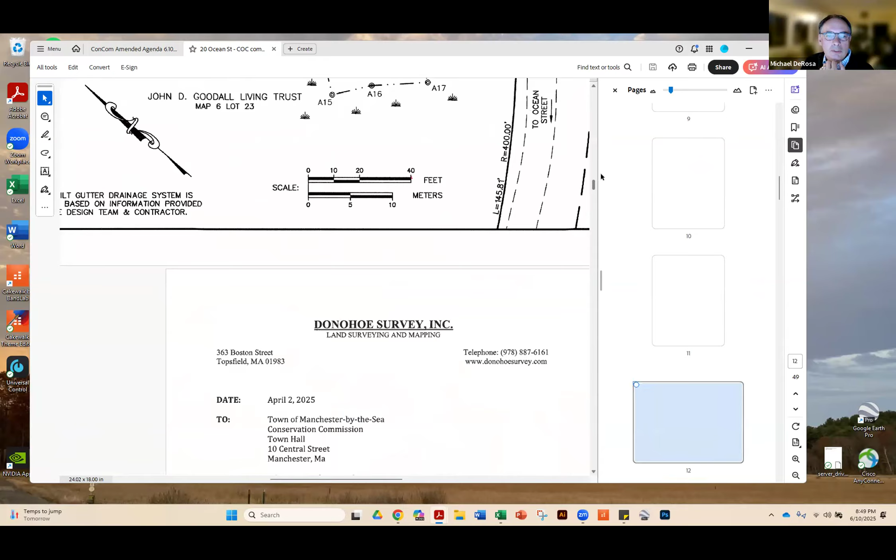And then there was a small retaining wall there that was constructed to retain some of that stuff. Let's see if I have a... yeah. And then largely this has been continued because of the plantings.

And we got through 2 growing seasons and things are looking good. This was the planting area down here. And the variations were, there's a little wall that was built here, and then this was paved. It was only paved to about here. So, it looks pretty good. I think we have photos, which I can't get to.

So this is the area that was planted by the driveway, and this is the area that was paved. More plantings, additional plantings - these are all part of the mitigation elements. Really, it's the pavement that was the issue, but we think it's warranted in order to have a stable surface there, an easily maintained surface, which will protect the wetland.

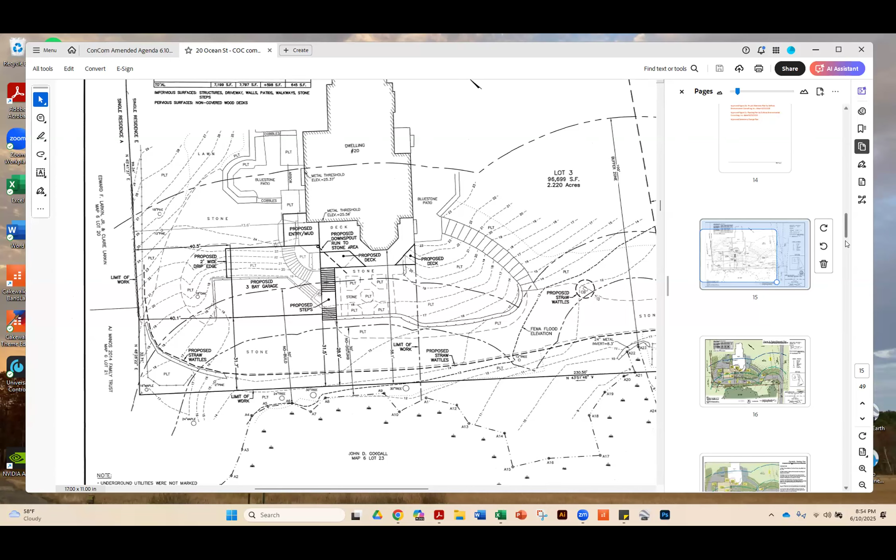It looks to me like that's gonna just erode the soil under the newly paved area. If you go back to that picture you had, Mike, of the driveway. Let me look. I suggest - this is Bethany, by the way - maybe me coming down and checking out this site myself. I can meet you there, Bethany, and we can walk it. Yeah, that would expedite this, I think. Yeah, that would help a lot.

There's no rush on this, so if we want to continue, that's fine. Yeah, I think I should look at it myself - I'll bring my little tape measure. That'd be great, good thought. Let's move this to the July 1st agenda, and I don't think that requires a vote with the commission. Mike, just email me. Okay, I will. Thanks. Thank you, Mike. Thank you, Bethany.

Lastly, we have a de minimis change request for an outstanding order of conditions at 168 Pine Street, David Doucette, DEP file 39904, map 32, lot 54. Bill, are you - no, Dan. Daniel Oppenheimer, there it is.

Mr. Oppenheimer, did you survive this long, and are you still online here? Dan, are you muted? We cannot hear you. You're not muted, we just can't hear you. I think maybe there's something perplexing - your headset's muted. We cannot hear you still. Give you a second.

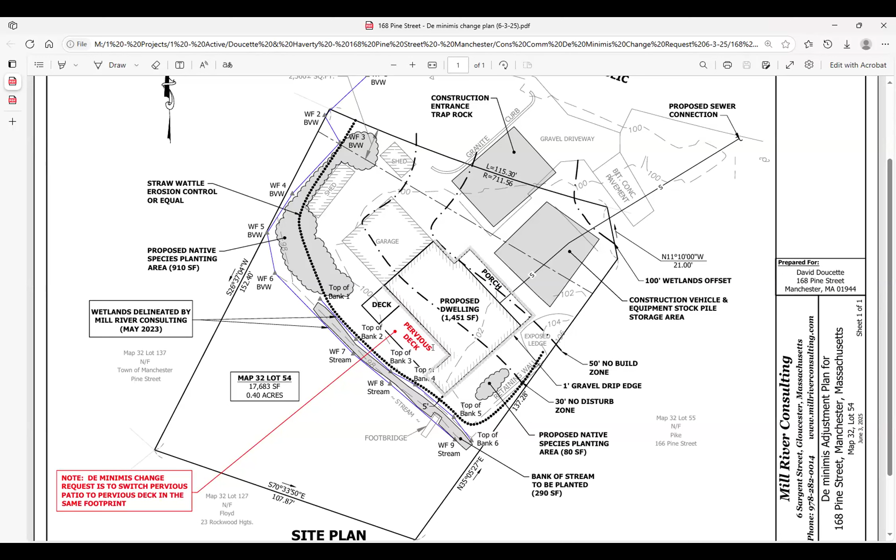I move we accept this change as though it was de minimis to the existing order of conditions for DEP file 39-904. Second. All those in favor? Sari, aye. Jeff, aye. Olga, aye. David, aye. Henry, aye. Gordon, aye. That was an aye from Gordon. Thank you.

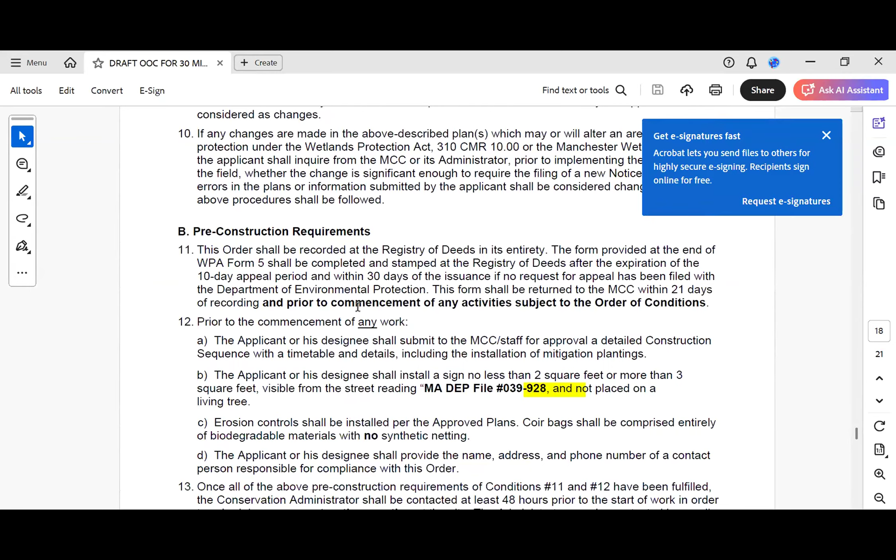And here is the project description, proposed construction of a dwelling in the riverfront area. I fixed the spelling, let's skip ahead to the special conditions. It's not on the coastal bank, so I crossed that one off. And in the mitigation plantings, I did: plantings must be shown.

I can edit this actively right now too, in case there's anything you want to add. But plantings must be shown on an approved planting plan. There are no mitigation plantings on this site, right?

Are there not? There are some plantings, but we're not treating them as mitigation for riverfront. Okay, so that one can come out. Just highlight it and hit delete.

Or, I usually... we don't want to mess up the numbering. It's hard to see the full screen because of the Zoom screen, I can't see the whole thing. Because it's numbered, I do a strike through so it doesn't mess up the numbers.

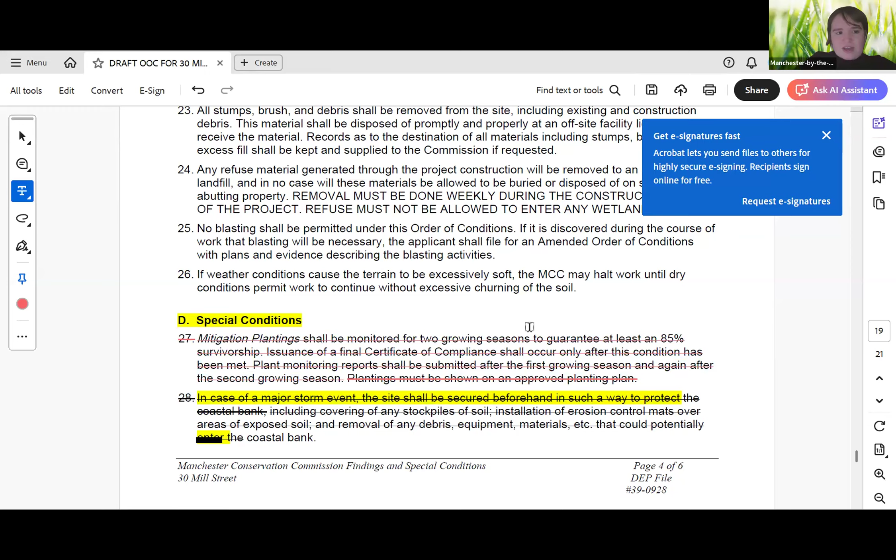Okay, gone. And there's no special condition, so it won't be perpetual. And what else do you need to see? Any perpetual conditions?

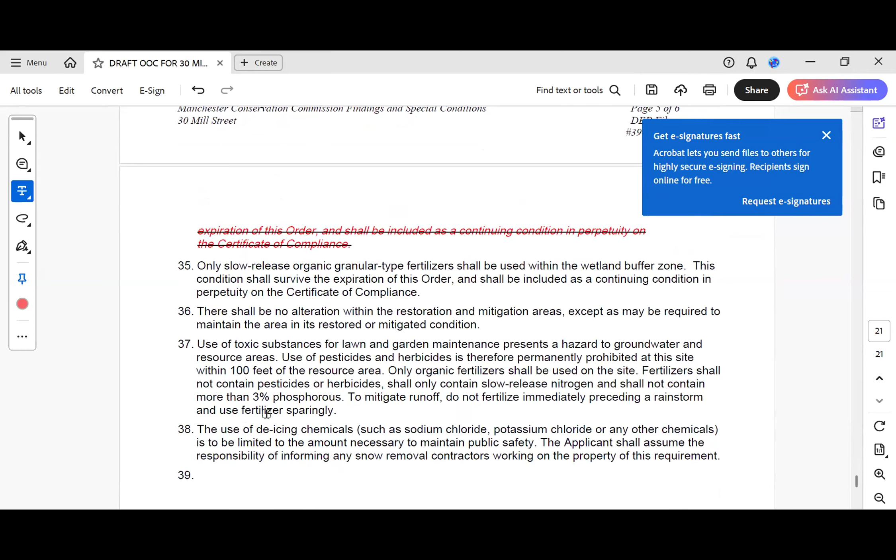It's basically like the ones that I crossed out, the ones that have been repeated over and over again, like additional alterations, pesticides and herbicides, yes, the usual. The only thing to add in this case was Henry's suggestion of suitable perpetual monuments for the no mow area.

And that they're subject to your approval. Okay, so what do you want me to add? Sorry, the applicant shall install suitable perpetual monuments. Applicant shall install

Suitable perpetual monuments indicating the no mow area. I get nervous typing in front of people. Sorry, you can fix the typo.

Sorry Steve, is it a no mow or a low mow area? I think it's a low mow. Yeah, low mow. Okay, low mow area. Okay, perfect, subject to approval by the Conservation Administrator.

Was there anything else on 30 Mill? Sorry, it's hard to see with everyone. What happened? Hold on.

It won't let me open it, ran out of text box. Just hold on for a second, it does this sometimes. Okay, subject to approval by the Conservation Administrator.

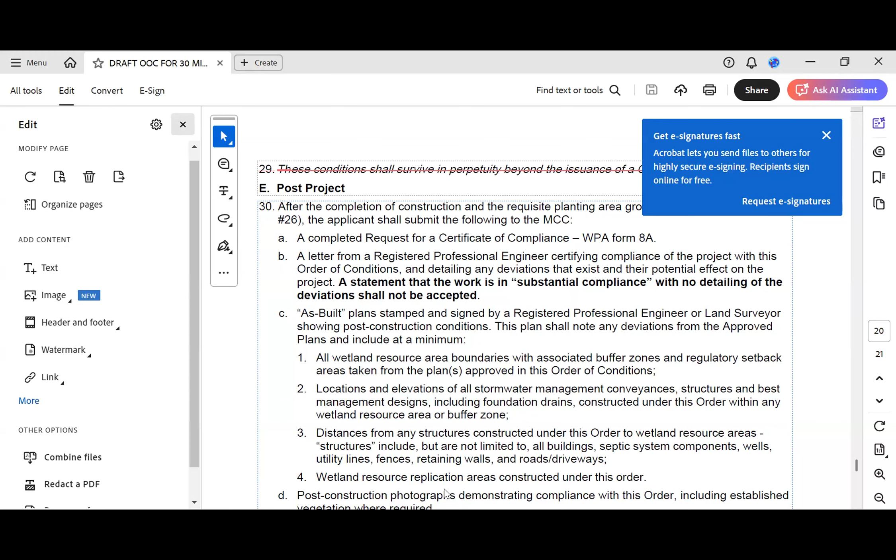Good work. Let's move to 35 Coolidge Point. Okay, just scroll through. We appreciate this preparation, thank you. No problem, sorry, my computer is kind of slow.

Okay, so here is the Manchester Conservation Commission. Here's the standard and special conditions. I think Steve, you looked at this one already. These are the ones I made for May, and this is the one that I edited.

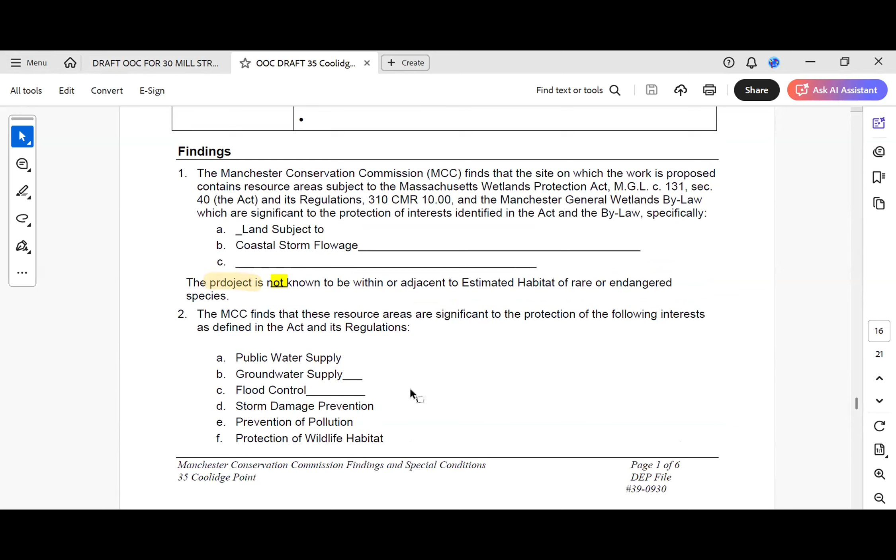I think I emailed it to you. Yeah, I think you did fix that. I know that typo was fixed in the last draft. Okay, so we can assume that you have a draft that really works here.

Actually, I could probably share if you have trouble. Yeah, I'll stop sharing for a second. Just give me a second, because I have the edited one somewhere in the mix.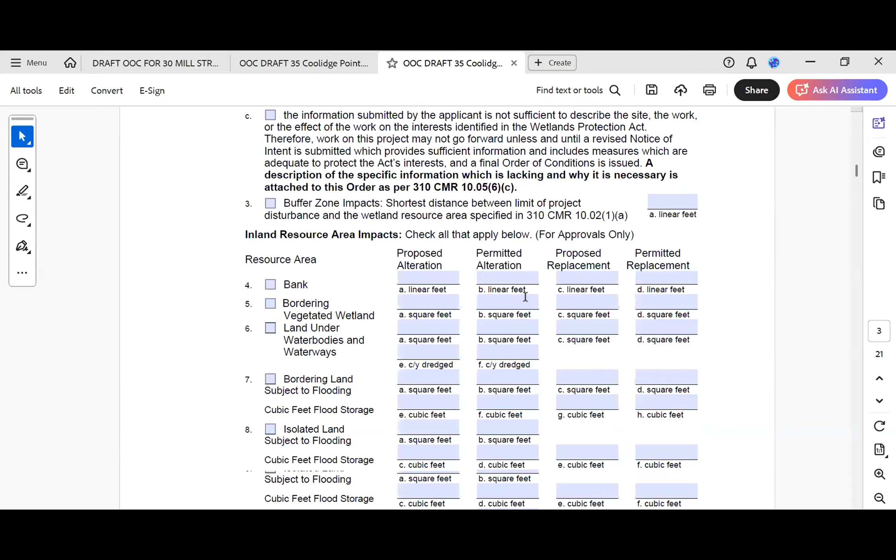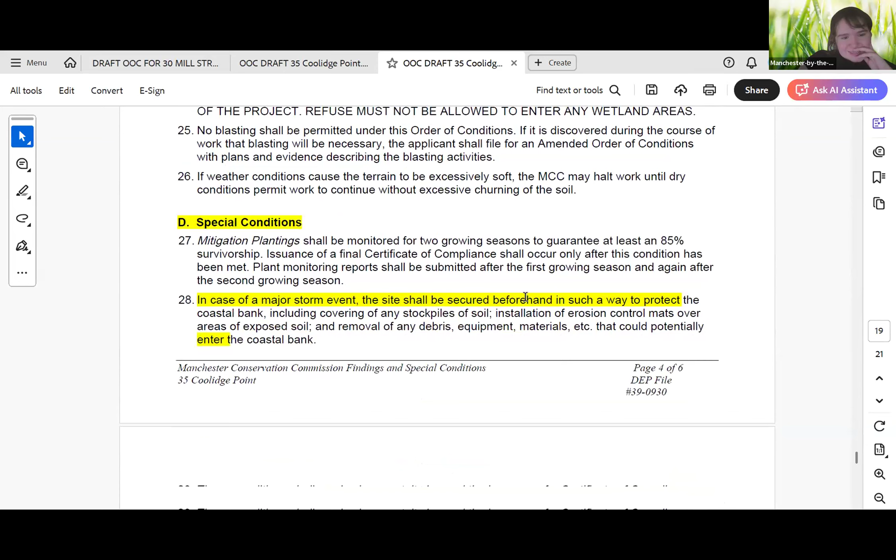As you see, it has been fixed. So we're going to the special conditions - same old, same old. I took out mitigation storm event 29, and for the perpetual conditions I took out 33, 34, and 35. The herbicides, de-icing chemicals, fertilizers are still there. I think this is fine. Others have any changes to suggest?

Looks good. All right, let me move that we issue an order of conditions for 35 Coolidge Point, DEP file 39-930, as drafted.

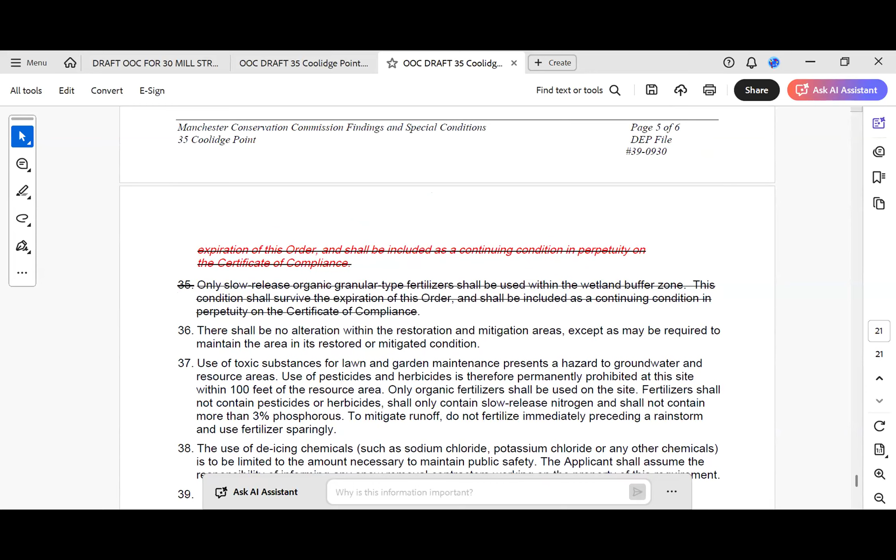Second. Thank you. All those in favor? Sari? Aye. David? Aye. Jeff? Aye. Gordon? Aye. Henry? Aye. Olga? Aye. And I am an aye. Have I missed anyone? That makes it unanimous. Good.

This is good, we're moving along. Okay, 35 Coolidge done. This is 37 Bennett - the updated one because you looked at it, Steve, before the May 22nd meeting.

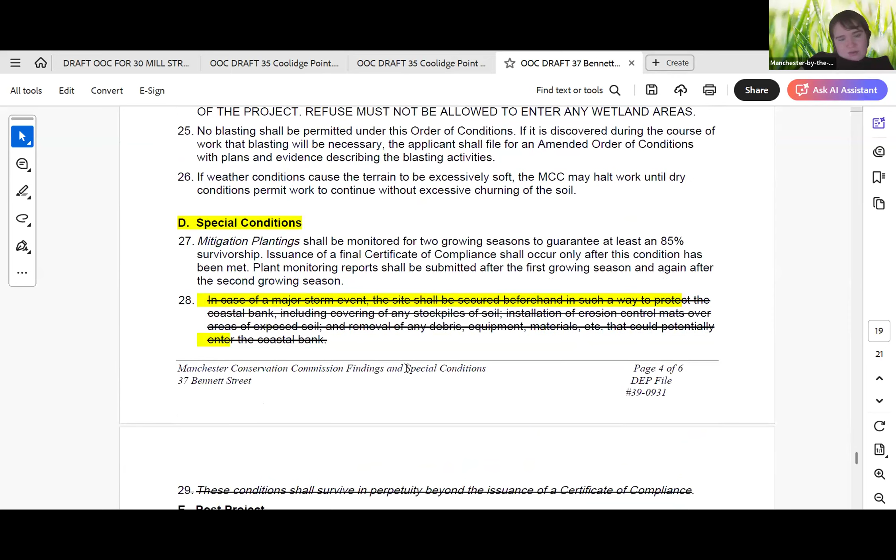So we're going right to the special conditions. Gonna make sure it calls for removal of the debris. 28's taken out, 29's taken out, and perpetual conditions 33 and 34 because it's not marine - you don't need a marine contractor, obviously. We have removal of the junk, yeah, we need removal of the debris under special.

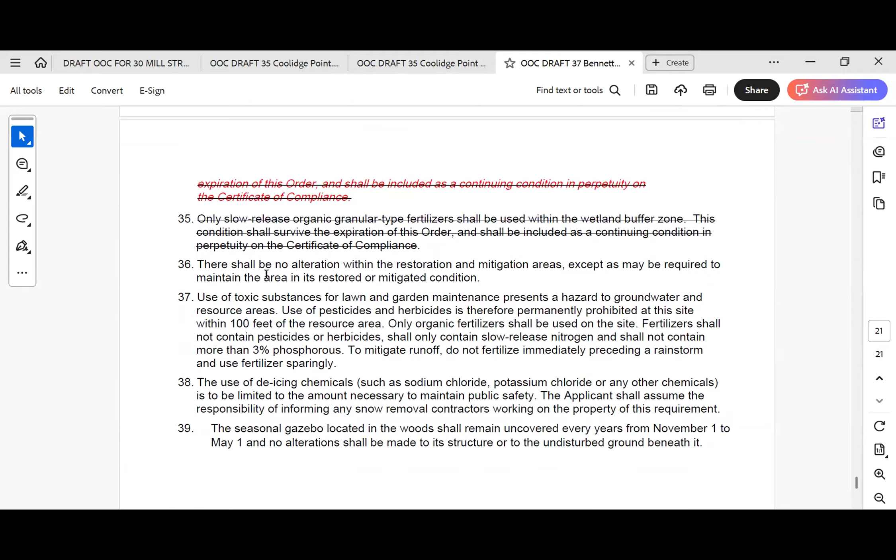Okay, let me just get rid of this one so we don't ruin the number system I have going. Yep, okay, that'll work. Yes.

What would you guys all like to see? All existing debris piles will be removed from the site prior to continuing construction work from the site. Properly disposed of, Steve? Yeah, sure. Okay, yeah, not just dumped into the brook.

Right, and really, sorry, I get nervous taking care of people. Properly disposed of - disposed of off-site, prior to continuing construction on the site. Just add off-site to disposed of. Disposed of off-site.

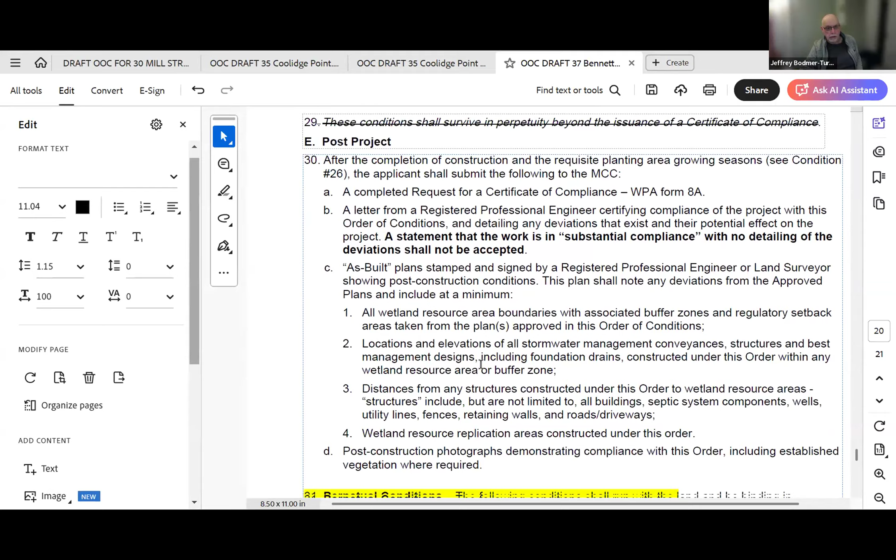Okay, awesome, perfect, great. And the last condition was about the gazebo, the perpetual one. Yeah, it should say be removed as well. Thank you, no problem. And then a perpetual for the gazebo.

Yeah, what did we say? Just want to make sure it still makes sense. Further down, please. Okay, there was nothing about seasonal. The gazebo located in the woods shall remain uncovered every year from November 1 to May 1, and no alteration shall be made to its structure or to the undisturbed ground beneath it. Good.

That pretty much gets it. Okay, let me move we grant an order of conditions to 37 Bennett. I'm sorry, 37 Bennett - yeah, thank you. I could easily go off the road.

I missed these guys last time too. DEP file 39931 with the special and perpetual conditions as drafted. Is there a second? Second.

Thank you. All those in favor? David? Aye. Henry? Aye. Gordon? Aye. Olga? Aye. Jeff? Aye. Marie? Aye. And I am an aye as well.

Thank you. I have Manchester Housing Authority.

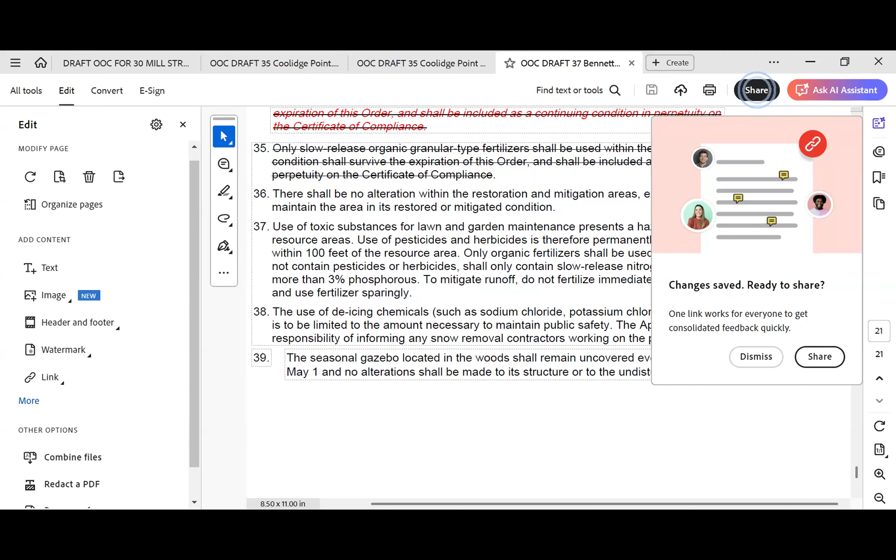Okay, well if we can do this, we'll stay within our worst case 3-hour disaster duration. Oh, we had a lot going on. That's true, wasn't our fault.

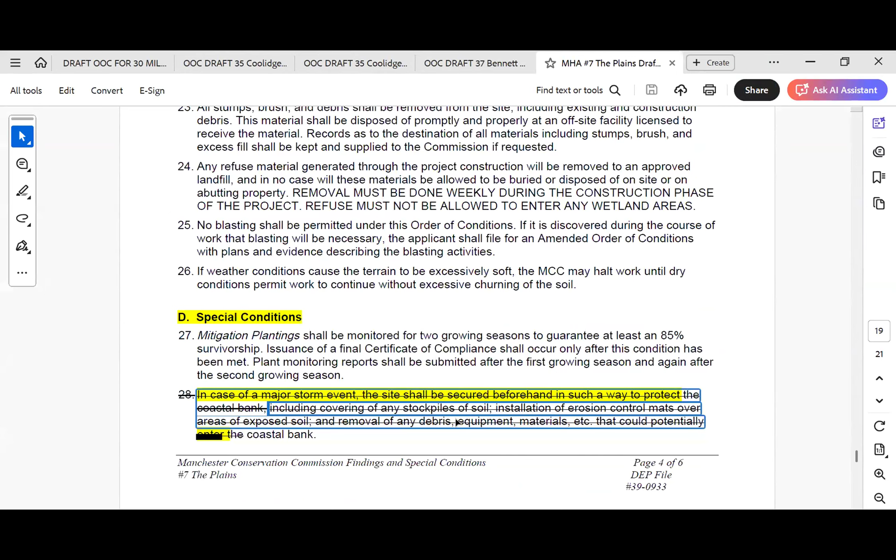And this one is going the same old conditions about the fertilizers. I don't see the need for any exceptional conditions here. Does anyone? No, no, should be straightforward.

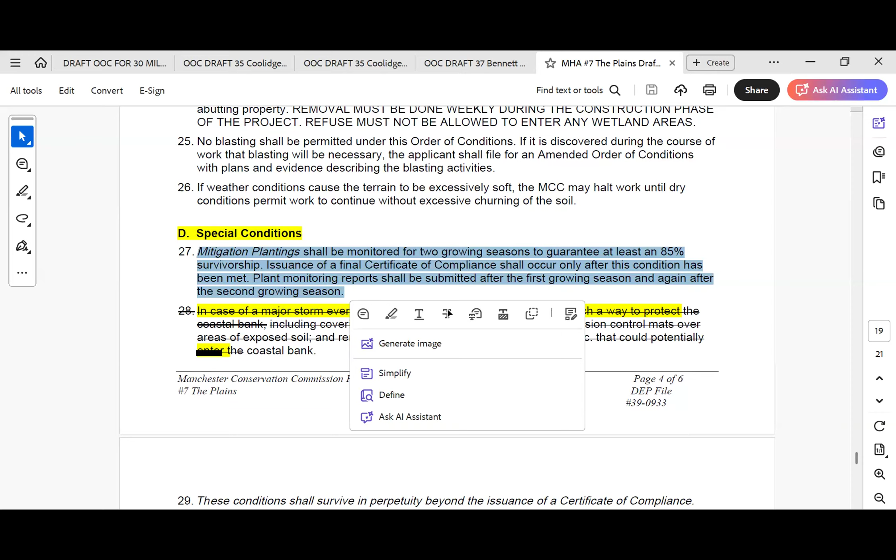Good. So they don't have mitigation plantings, am I right? No, they have no mitigation planting. So strike through. And then perpetual is about the fertilizer. There's no restoration or mitigation areas, so 36 can come out - not applicable, strike through, okay.

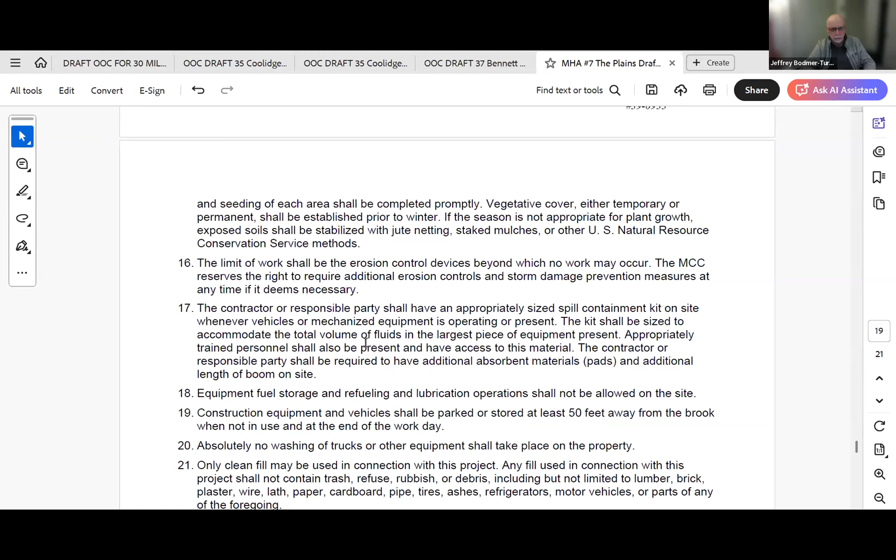And standard conditions include soil runoff, wattle, erosion control - it always includes that, yeah. And there it is, you just pass it. This erosion control shall be installed per approved plans.

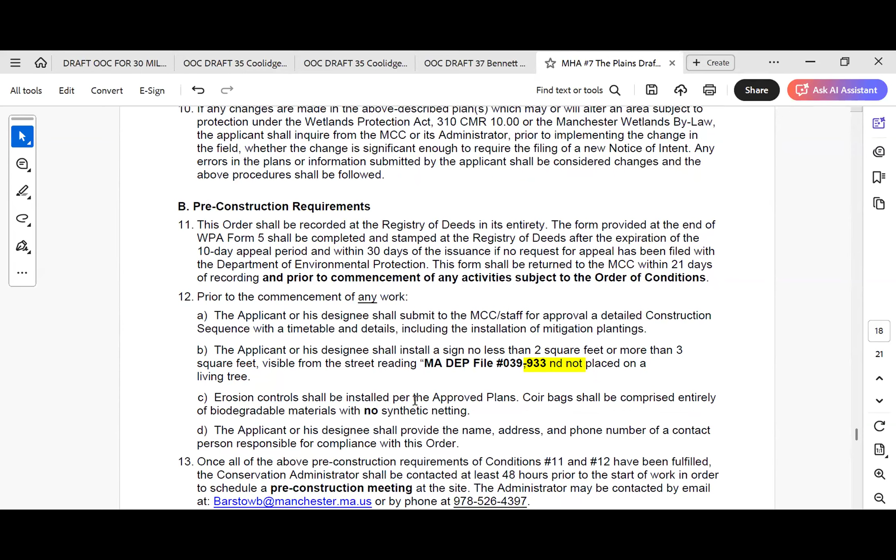Just a fine point, but I think we still have two kind of overlapping or duplicative perpetual conditions. One governs fertilizer, and the other governs fertilizer and pesticide. So I think we got rid of this one because 37 goes more in depth - duplicative. Right, good, okay.

Okay, any other changes, edits, additions? No, it's good. Let me move then that we issue the order of conditions for the plains.

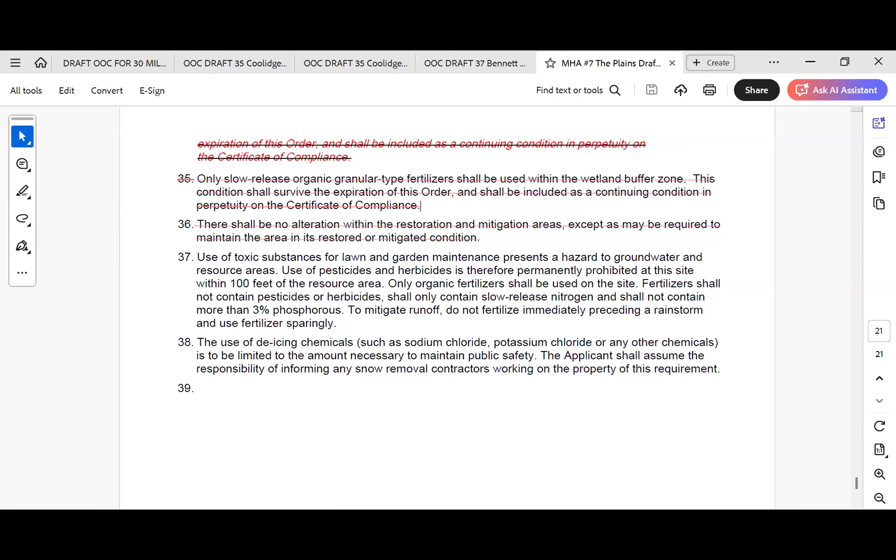DEP file 39933 as drafted. Is there a second? Second. Thank you. All those in favor? Suri, aye. Olga, aye. Jeff, aye. Gordon, aye. David, aye. Henry, aye. And I am an aye.

Well done, four orders of condition. I'll mail those on Thursday.

I would like a chance to revisit the orders of condition we issued previously on the culvert and the pond. I may hunt for them and ask some of you to weigh in, and we'll handle them on July 1st.

Just to check, July 1st is very close to the July 4th holiday. How many people expect they'll be here? I understand Suri will no longer be eligible.

Thank you for everything, Suri. Thank you, Bessie. I'll miss seeing you on Thursday. Your retirement present is that you don't have to attend any of these meetings. Although you're always welcome as a special guest. Oh, thank you, I just want to go on the site visits. We'll let you know, you can be my company on a site visit. Special alum, good, forward to seeing.